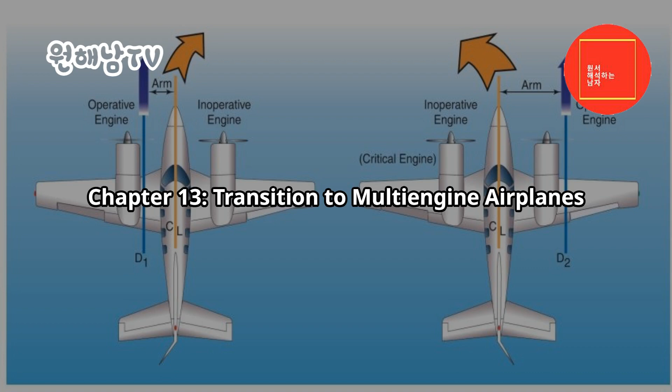Chapter 13 – Transition to multi-engine airplanes. Introduction. This chapter is devoted to the factors associated with the operation of small multi-engine airplanes.

For the purpose of this handbook, a small multi-engine airplane is a reciprocating or turbopropeller-powered airplane with a maximum certificated takeoff weight of 12,500 pounds or less. This discussion assumes a conventional design with two engines, one mounted on each wing. Reciprocating engines are assumed unless otherwise noted. The term light twin, although not formally defined in the regulations, is used herein as a small multi-engine airplane with a maximum certificated takeoff weight of 6,000 pounds or less.

There are several unique characteristics of multi-engine airplanes that make them worthy of a separate class rating. The one-engine inoperative (OEI) flight information presented in this chapter emphasizes the significant difference between flying a multi-engine and a single-engine airplane. However, all pilots need appropriate knowledge, risk management strategies, and skills to fly safely in any airplane they fly, and mastery of OEI flight is only one aspect of safe multi-engine flying.

The modern, well-equipped multi-engine airplane can be remarkably capable under many circumstances, but the performance and system redundancy of a multi-engine airplane only increase safety if the pilot is trained and proficient. The airplane manufacturer is the final authority on the operation of a particular make and model airplane. Flight instructors and learners should use the FAA-Approved Airplane Flight Manual (AFM) and/or the Pilot's Operating Handbook (POH). The airplane manufacturer's guidance and procedures take precedence over any general recommendations made in this handbook.

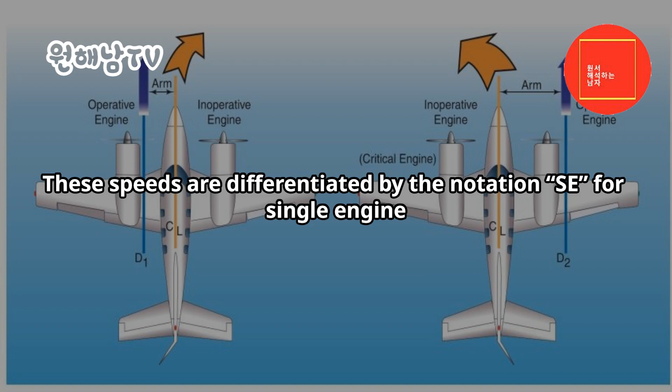Terms and definitions. Pilots of single-engine airplanes are already familiar with many performance V-speeds and their definitions. Twin-engine airplanes have several additional V-speeds unique to OEI operation. These speeds are differentiated by the notation SE for single-engine. A review of some key V-speeds and several new V-speeds unique to twin-engine airplanes are listed below.

VR – rotation speed, the speed at which back pressure is applied to rotate the airplane to a takeoff attitude. VLOF – lift-off speed, the speed at which the airplane leaves the surface. Note: some manufacturers reference takeoff performance data to VR, others to VLOF.

Vx – best angle of climb speed, the speed at which the airplane gains the greatest altitude for a given distance of forward travel. VXSE – best angle of climb speed with OEI. Vy – best rate of climb speed, the speed at which the airplane gains the most altitude for a given unit of time. VYSE – best rate of climb speed with OEI, marked with a blue radial line on most airspeed indicators. Above the single-engine absolute ceiling, VYSE yields the minimum rate of sink.

VSSE – safe, intentional OEI speed, originally known as safe single-engine speed. It is the minimum speed to intentionally render the critical engine inoperative. VREF – reference landing speed, an airspeed used for final approach, which is normally 1.3 times VSO, the stall speed in the landing configuration. The pilot may adjust the approach speed for winds and gusty conditions by using VREF plus an additional number of units, e.g., VREF plus 5.

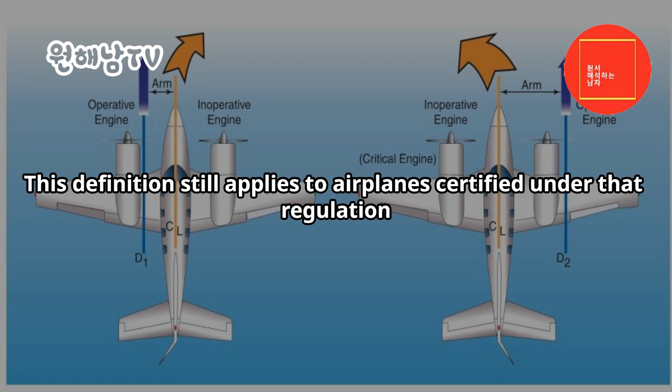VMC was previously defined in 14 CFR Part 23, Section 23.149 as the calibrated airspeed at which, when the critical engine is suddenly made inoperative, it is possible to maintain control of the airplane with that engine still inoperative, and thereafter maintain straight flight at the same speed with an angle of bank of not more than 5 degrees. This definition still applies to airplanes certified under that regulation. There is no requirement under either determination that the airplane be capable of climbing at this airspeed.

VMC only addresses directional control. Further discussion of VMC as determined during airplane certification and demonstrated in pilot training follows later in this chapter. Unless otherwise noted, when V-speeds are given in the AFM/POH, they apply to sea level, standard day conditions at maximum takeoff weight. Performance speeds vary with aircraft weight, configuration, and atmospheric conditions.

Speeds may be stated in statute miles per hour (mph) or knots (kt), and they may be given as calibrated airspeeds (CAS) or indicated airspeeds (IAS). As a general rule, the newer AFM/POHs show V-speeds in knots indicated airspeed (KIAS). Some V-speeds are also stated in knots calibrated airspeed (KCAS) to meet certain regulatory requirements. Whenever available, pilots should operate the airplane from published indicated airspeeds.

Rate of climb is the altitude gain per unit of time, while climb gradient is the actual measure of altitude gain per 100 feet of horizontal travel, expressed as a percentage. An altitude gain of 1.5 feet per 100 feet of travel, or 15 feet per 1,000, or 150 feet per 10,000, is a climb gradient of 1.5%.

There is a dramatic performance loss associated with the loss of an engine, particularly just after takeoff. Any airplane's climb performance is a function of thrust horsepower in excess of that required for level flight. In a hypothetical twin with each engine producing 200 thrust horsepower, assume the total level flight thrust horsepower required is 175. The airplane would ordinarily have a reserve of 225 thrust horsepower available for climb. Loss of one engine would leave only 25 (200-175) thrust horsepower available for climb, a drastic reduction.

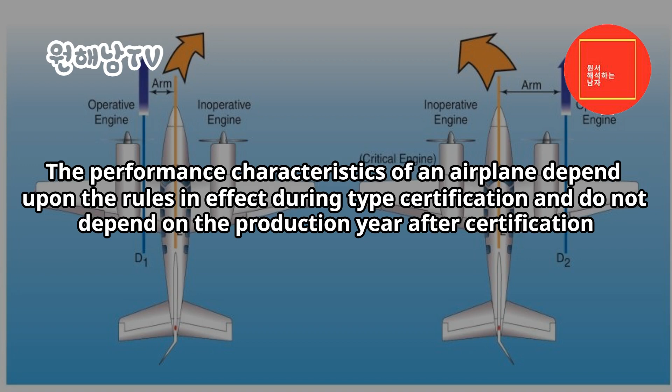The performance characteristics of an airplane depend upon the rules in effect during type certification, and do not depend on the production year after certification. The current amendment to 14 CFR Part 23, 81 FR 96689, went into effect on August 30, 2017. This includes certification of normal category airplanes with a passenger seating configuration of 19 or less, and a maximum certificated takeoff weight of 19,000 pounds or less, Section 23.2005(a).

Current 14 CFR Part 23 certification rules, Section 23.2005(b), classify airplanes into certification levels 1 through 4 based on maximum passenger seating configuration. For example, a Level 2 airplane has a passenger seating configuration between 2 and 6 passengers. The rule further divides airplanes into two different performance levels based on speed, Section 23.2005(c).

After a critical loss of thrust, a Level 2 low-speed airplane (VNO or VMO less than or equal to 250 knots calibrated airspeed, and MMO less than or equal to 0.6) that does not meet single-engine crashworthiness requirements requires a climb gradient of at least 1.5% at a pressure altitude of 5,000 feet in the cruise configuration for certification, Section 23.2120(b)(1).

While the various subsets of airplanes receiving certification under the current Part 23 meet specific single-engine climb performance criteria, as listed in 14 CFR Part 23, Section 23.2120(b), the historical 14 CFR Part 23 single-engine climb performance requirements for reciprocating engine-powered multi-engine airplanes are broken down as follows.

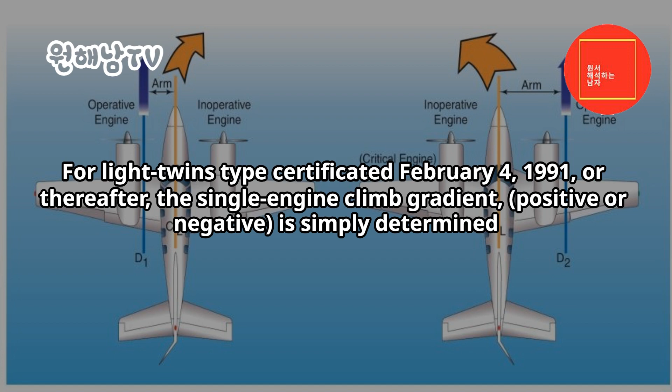Operation of systems. This section deals with systems and equipment that are generally installed in multi-engine airplanes. Multi-engine airplanes share many features with complex single-engine airplanes; however, there are certain features that are found more often in airplanes with 2 or more engines.

Feathering propellers. Although the propellers of a multi-engine airplane may appear identical to a constant-speed propeller used in many single-engine airplanes, this is usually not the case. The pilot of a typical multi-engine airplane can feather the propeller of an inoperative engine, since it stops engine rotation with the propeller blade streamlined with the airplane's relative wind. Feathering the propeller of an inoperative engine minimizes propeller drag (Figure 13-2). Depending upon single-engine performance, this feature often permits continued flight to a suitable airport following an engine failure.

Feathering is important because of the change in parasite drag with propeller blade angle (Figure 13-3). When the propeller blade angle is in the feathered position, parasite drag from the propeller is at a minimum.

In a typical multi-engine airplane, the parasite drag from a single, feathered propeller is a small part of the airplane's total drag. At the smaller blade angles near the flat pitch position, the drag added by the propeller is large. At these small blade angles, the propeller windmilling at high RPM can create enough drag to make the airplane difficult or impossible to control. A propeller windmilling at high speed in the low range of blade angles can produce parasite drag as great as the parasite drag of the entire airframe.

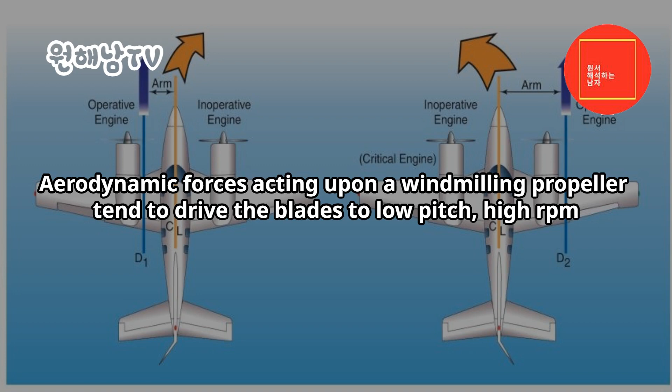In effect, the only thing that keeps these propellers from feathering is a constant supply of high-pressure engine oil. This is necessary to enable propeller feathering in the event of a loss of oil pressure or a propeller governor failure. Aerodynamic forces acting upon a windmilling propeller tend to drive the blades to low pitch, high RPM. Counterweights attached to the shank of each blade tend to force the blades to high pitch, low RPM. Inertia, or the apparent force called centrifugal force, acting through the counterweights, is generally slightly greater than the aerodynamic forces.

Therefore, centrifugal force would drive the blades to high pitch and low RPM were it not for an additional force acting through the propeller governor. A controlling force generated from high-pressure oil from the propeller governor pushes the propeller blade angles toward low pitch and high RPM. Thus, a reduction in oil pressure allows the counterweights to drive the blades to a higher pitch and decreases engine RPM.

To feather the propeller, the control is brought fully aft. All oil pressure is dumped from the governor, and the counterweights drive the propeller blades toward feather. As centrifugal force acting on the counterweights decays from decreasing RPM, additional force is needed to completely feather the blades. This additional force comes from either a spring or high-pressure air stored in the propeller dome, which forces the blades into the feathered position. The entire process may take up to 10 seconds.

Feathering a propeller only alters blade angle and stops engine rotation. To completely secure the engine, the pilot turns off the fuel, mixture, electric boost pump, fuel selector, ignition, and alternator/generator, and closes the cowl flaps. If the airplane is pressurized, there may also be an air bleed to close for the failed engine. Some airplanes are equipped with firewall shutoff valves that secure several of these systems with a single switch.

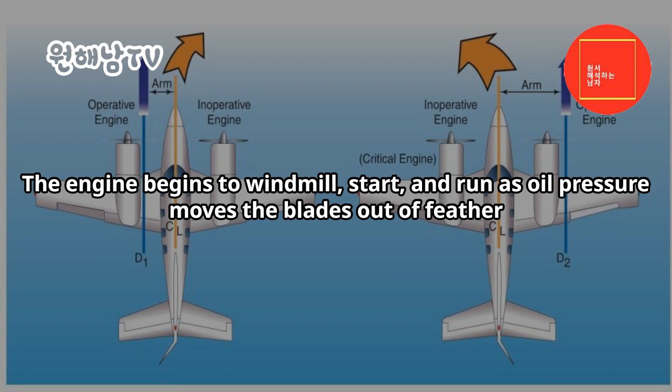To unfeather a propeller, the engine should be rotated so that oil pressure can be generated to move the propeller blades from the feathered position. The ignition is turned on prior to engine rotation with the throttle at low idle and the mixture rich. With the propeller control in a high RPM position, the starter is engaged. The engine begins to windmill, start, and run as oil pressure moves the blades out of feather. As the engine starts, the propeller RPM should be immediately reduced until the engine has had several minutes to warm up. The pilot should monitor cylinder head and oil temperatures.

An unfeathering accumulator is a device that permits starting a feathered engine in flight without the use of the electric starter. An accumulator is any device that stores a reserve of high pressure. On multi-engine airplanes, the unfeathering accumulator stores a small reserve of engine oil under pressure from compressed air or nitrogen.

To start a feathered engine in flight, the pilot moves the propeller control out of the feather position to release the accumulator pressure. The oil flows under pressure to the propeller hub and drives the blades toward the high RPM, low pitch position, whereupon the propeller usually begins to windmill. If fuel and ignition are present, the engine starts and runs. High oil pressure from the propeller governor recharges the accumulator just moments after engine rotation begins, making it available for another unfeathering cycle, if needed.

For airplanes used in training, an unfeathering accumulator may prolong the life of the electric starter and battery. If the accumulator fails to bring the propeller out of feather, the electric starter may be engaged. In any event, the AFM/POH procedures should be followed for the exact unfeathering procedure.

Both feathering and starting a feathered reciprocating engine on the ground are strongly discouraged by manufacturers due to the excessive stress and vibrations generated. As just described, a loss of oil pressure from the propeller governor allows the counterweights, spring, and/or dome charge to drive the blades to feather.

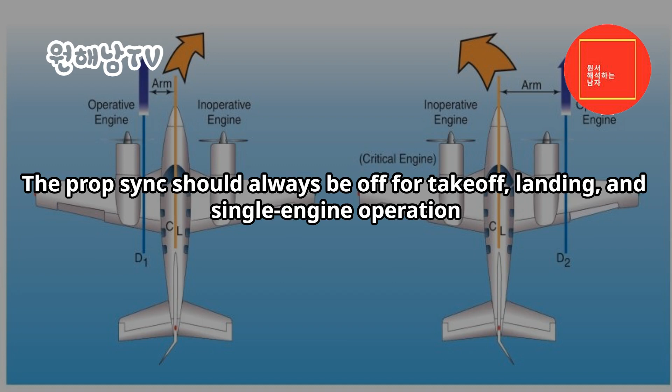The prop sync should always be off for takeoff, landing, and single-engine operation. The AFM/POH should be consulted for system description and limitations.

A variation on the propeller synchronizer is the propeller synchrophaser. A propeller synchrophaser acts much like a synchronizer to precisely match RPM, but it goes one step further. It not only matches RPM but actually compares and adjusts the positions of the individual blades of the propellers in their arcs. There can be significant propeller noise and vibration reductions with a propeller synchrophaser.

From the pilot's perspective, operation of a propeller synchronizer and a propeller synchrophaser are very similar. A synchrophaser is also commonly referred to as prop sync, although that is not entirely correct nomenclature from a technical standpoint.

As a pilot aid to manually synchronizing the propellers, some twins have a small gauge mounted in or by the tachometers, with a propeller symbol on a disc that spins. The pilot manually fine-tunes the engine RPM so as to stop disc rotation, thereby synchronizing the propellers.

This is a useful backup to synchronizing engine RPM using the audible propeller beat. This gauge is also found installed with most propeller synchronizer and synchrophaser systems. Some synchrophaser systems use a knob for the pilot to control the phase angle.

Fuel crossfeed: fuel crossfeed systems are also unique to multi-engine airplanes. Using crossfeed, an engine can draw fuel from a fuel tank located in the opposite wing. On most multi-engine airplanes, operation in the crossfeed mode is an emergency procedure used to extend airplane range and endurance in OEI flight.

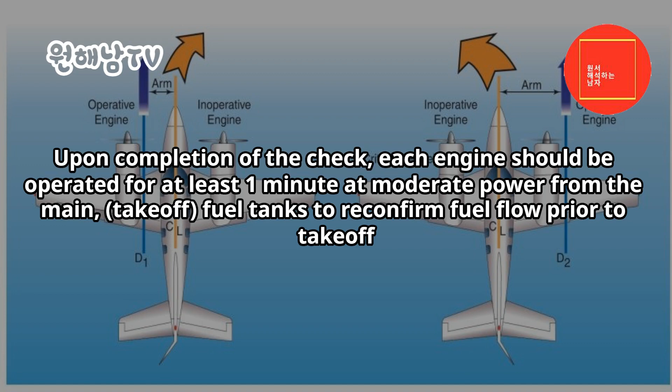This suggested check is not required prior to every flight. Crossfeed lines are ideal places for water and debris to accumulate unless they are used from time to time and drained using their external drains during pre-flight. Crossfeed is ordinarily not used for completing a flight with one engine inoperative when an alternate airport is nearby.

Pilots should never use crossfeed during takeoff or for normal landing operations with both engines operating. A landing with one engine inoperative using crossfeed may be necessary if setting normal fuel flow would cause the operative engine to fail.

Combustion heater. Combustion heaters are another common item on multi-engine airplanes not found on single-engine airplanes. A combustion heater is best described as a small furnace that burns gasoline to produce heated air for occupant comfort and windshield defogging.

Most are thermostatically operated and have a separate hour meter to record time in service for maintenance purposes. Automatic over-temperature protection is provided by a thermal switch mounted on the unit that cannot be accessed in flight. This requires the pilot or mechanic to visually inspect the unit for possible heat damage in order to reset the switch.

Manufacturers often suggest a cool-down period when shutting down a combustion heater. Most heater instructions recommend that outside air be permitted to circulate through the unit for at least 15 seconds in flight, or that the ventilation fan can be operated for at least 2 minutes on the ground. Failure to provide an adequate cool-down usually trips the thermal switch and renders the heater inoperative until the switch is reset.

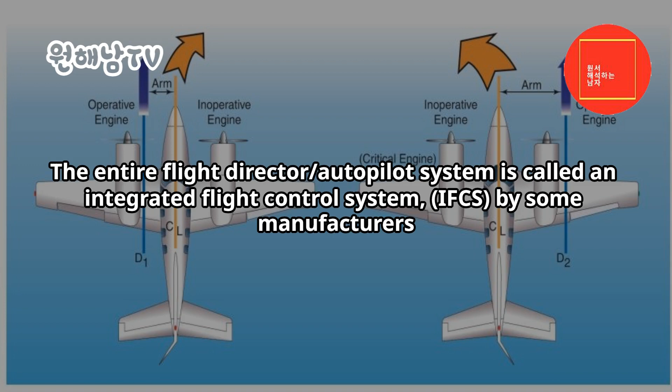The entire Flight Director Autopilot system is called an Integrated Flight Control System (IFCS) by some manufacturers. Others may use the term Automatic Flight Control System (AFCS). The FD, AP system may be employed at the following different levels.

Off, raw data. Flight Director, computed commands. Autopilot. With the system off, the FCI operates as an ordinary attitude indicator. On most FCIs, the command bars are biased out of view when the FD is off. The pilot maneuvers the airplane as though the system were not installed.

To maneuver the airplane using the FD, the pilot enters the desired modes of operation: heading, altitude, navigation, nav intercept, and tracking on the FD, AP mode controller. The computed flight commands are then displayed to the pilot through either a single cue or dual cue system in the FCI.

On a single cue system, the commands are indicated by V-bars. On a dual cue system, the commands are displayed on two separate command bars, one for pitch and one for roll. To maneuver the airplane using computed commands, the pilot flies the symbolic airplane of the FCI to match the steering cues presented.

On most systems, the FD needs to be operating to engage the autopilot. At any time thereafter, the pilot may engage the autopilot through the mode controller. The autopilot then maneuvers the airplane to satisfy the computed commands of the FD.

Like any computer, the FD, AP system only does what it is told. The pilot should ensure that it has been programmed properly for the particular phase of flight desired. The armed and/or engaged modes are usually displayed on the mode controller or separate annunciator lights.

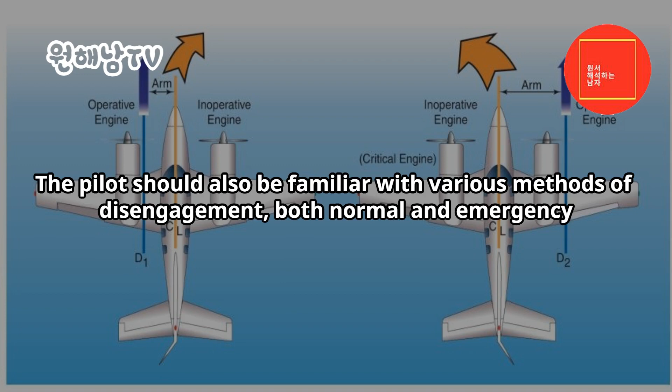The pilot should also be familiar with various methods of disengagement, both normal and emergency. System details, including approvals and limitations, can be found in the supplements section of the AFM/POH. Additionally, many avionics manufacturers can provide informative pilot operating guides upon request.

Yaw damper. The yaw damper is a servo that moves the rudder in response to inputs from a gyroscope or accelerometer that detects yaw rate or lateral Gs, respectively. The yaw damper reduces motion about the vertical axis caused by turbulence. Yaw dampers on swept-wing airplanes provide another, more vital function of damping Dutch roll characteristics.

Occupants feel a smoother ride, particularly if seated in the rear of the airplane, when the yaw damper is engaged. The yaw damper should be off for takeoff and landing. There may be additional restrictions against its use with one engine inoperative. Most yaw dampers can be engaged independently of the autopilot.

Alternator generator. On a multi-engine aircraft, each engine has an alternator or generator installed. Alternator or generator paralleling circuitry matches the output of each engine's alternator generator, so that the electrical system load is shared equally between them.

In the event of an alternator/generator failure, the inoperative unit can be isolated and the entire electrical system powered from the remaining one. Depending upon the electrical capacity of the alternator/generator, the pilot may need to reduce the electrical load, referred to as load shedding, when operating on a single unit. The AFM/POH contains system description and limitations.

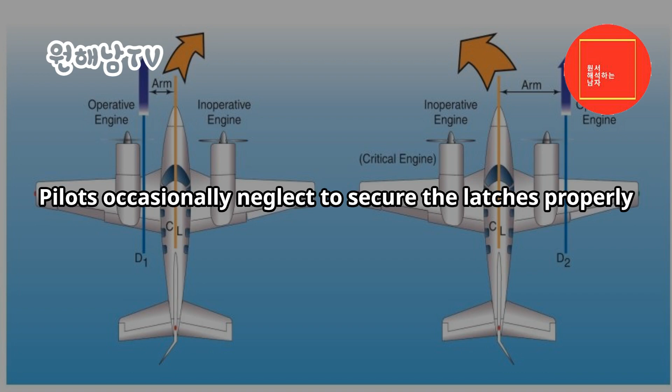Nose baggage compartment. Nose baggage compartments are common on multi-engine airplanes, and are even found on a few single-engine airplanes. There is nothing strange or exotic about a nose baggage compartment, and the usual guidance concerning observation of load limits applies. Pilots occasionally neglect to secure the latches properly. When improperly secured, the door may open and the contents may be drawn out, usually into the propeller arc and just after takeoff. Even when the nose baggage compartment is empty, airplanes have been lost when the pilot became distracted by the open door. Security of the nose baggage compartment latches and locks is a vital pre-flight item.

Most airplanes continue to fly with a nose baggage door open. There may be some buffeting from the disturbed airflow, and there is an increase in noise. Pilots should never become so preoccupied with an open door, of any kind, that they fail to fly the airplane. Inspection of the compartment interior is another important pre-flight item. More than one pilot has been surprised to find a supposedly empty compartment packed to capacity or loaded with ballast. The tow bars, engine inlet covers, windshield sunscreens, oil containers, spare chocks, and miscellaneous small hand tools that find their way into baggage compartments should be secured to prevent damage from shifting in flight.

Anti-icing/de-icing equipment. Anti-icing/de-icing equipment is frequently installed on multi-engine airplanes and may consist of a combination of different systems. These may be classified as either anti-icing or de-icing, depending upon function. The presence of anti-icing and de-icing equipment, even though it may appear elaborate and complete, does not necessarily mean that the airplane is approved for flight in icing conditions. The AFM/POH, placards, and even the manufacturer should be consulted for specific determination of approvals and limitations.

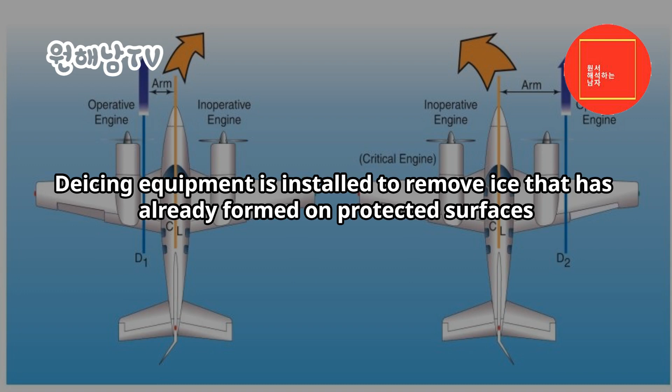De-icing equipment is generally limited to pneumatic boots on wing and tail leading edges. De-icing equipment is installed to remove ice that has already formed on protected surfaces. Upon pilot actuation, the boots inflate with air from the pneumatic pumps to break off accumulated ice. After a few seconds of inflation, they are deflated back to their normal position with the assistance of a vacuum. The pilot monitors the buildup of ice and cycles the boots as directed in the AFM/POH. An ice light on the left engine nacelle allows the pilot to monitor wing ice accumulation at night.

Other airframe equipment necessary for flight in icing conditions includes an alternate induction air source and an alternate static system source. Ice-tolerant antennas are also installed. In the event of impact ice accumulating over normal engine air induction sources, carburetor heat (carbureted engines) or alternate air (fuel-injected engines) should be selected. Ice buildup on normal induction sources can be detected by a loss of engine RPM with fixed-pitch propellers and a loss of manifold pressure with constant-speed propellers. On some fuel-injected engines, an alternate air source is automatically activated with blockage of the normal air source.

The pilot may activate the alternate static source by opening a valve or a fitting in the flight deck. Activation may create airspeed indicator, altimeter, or vertical speed indicator (VSI) errors. A correction table is frequently provided in the AFM/POH.

Anti-icing/de-icing equipment only eliminates ice from the protected surfaces. Significant ice accumulations may form on unprotected areas, even with proper use of anti-ice and de-ice systems. Flight at high angles of attack (AOA), or even normal climb speeds, permits significant ice accumulations on lower wing surfaces, which are unprotected. Many AFM/POHs provide minimum speeds to be maintained in icing conditions. Degradation of all flight characteristics and large performance losses can be expected with ice accumulations. Pilots should not rely upon the stall warning devices for adequate stall warning with ice accumulations.

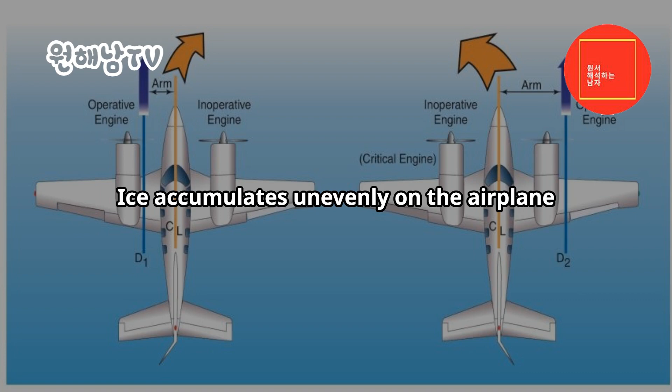Ice accumulates unevenly on the airplane. It adds weight and drag, primarily drag, and decreases thrust and lift. Even wing shape affects ice accumulation. Thin airfoil sections are more prone to ice accumulation than thick, highly cambered sections. For this reason, certain surfaces, such as the horizontal stabilizer, are more prone to icing than the wing.

With ice accumulations, landing approaches should be made with a minimum wing flap setting, since flap extension increases the AOA of the horizontal stabilizer, and with an added margin of airspeed. Sudden and large configuration and airspeed changes should be avoided.

Unless otherwise recommended in the AFM/POH, the autopilot should not be used in icing conditions. Continuous use of the autopilot masks trim and handling changes that occur with ice accumulation. Without this control feedback, the pilot may not be aware of ice accumulation building to hazardous levels. The autopilot suddenly disconnects when it reaches design limits, and the pilot may find the airplane has assumed unsatisfactory handling characteristics.

The installation of anti-ice/de-ice equipment on airplanes without AFM/POH approval for flight into icing conditions is to facilitate escape when such conditions are inadvertently encountered. Even with AFM/POH approval, the prudent pilot avoids icing conditions to the maximum extent practicable and avoids extended flight in any icing conditions. No multi-engine airplane is approved for flight into severe icing conditions, and none are intended for indefinite flight in continuous icing conditions.

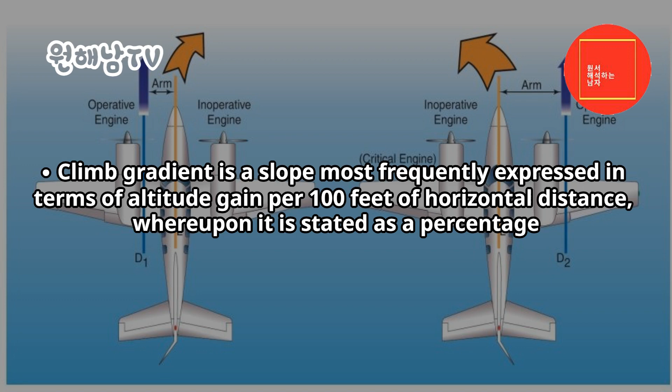Climb gradient is a slope most frequently expressed in terms of altitude gain per 100 feet of horizontal distance, whereupon it is stated as a percentage. A 1.5% climb gradient is an altitude gain of 1.5 feet per 100 feet of horizontal travel. Climb gradient may also be expressed as a function of altitude gain per nautical mile, NM, or as a ratio of the horizontal distance to the vertical distance, 10:1, for example. Unlike rate of climb, climb gradient is affected by wind. Climb gradient is improved with a headwind component and reduced with a tailwind component.

The all-engine service ceiling of multi-engine airplanes is the highest altitude at which the airplane can maintain a steady rate of climb of 100 fpm with both engines operating. The airplane has reached its absolute ceiling when climb is no longer possible. The single-engine service ceiling is reached when the multi-engine airplane can no longer maintain a 50 fpm rate of climb with OEI, and its single-engine absolute ceiling when climb is no longer possible.

The takeoff in a multi-engine airplane should be planned in sufficient detail so that the appropriate action is taken in the event of an engine failure. The pilot should be thoroughly familiar with the airplane's performance, capabilities and limitations in order to make an informed takeoff decision as part of the pre-flight planning. That decision should be reviewed as the last item of the before takeoff checklist.

In the event of an engine failure shortly after takeoff, the decision is basically one of continuing flight or landing, even off airport. If single-engine climb performance is adequate for continued flight, and the airplane has been promptly and correctly configured, the climb after takeoff may be continued. If single-engine climb performance is such that climb is unlikely or impossible, a landing has to be made in the most suitable area. To be avoided above all is attempting to continue flight when it is not within the airplane's performance capability to do so.

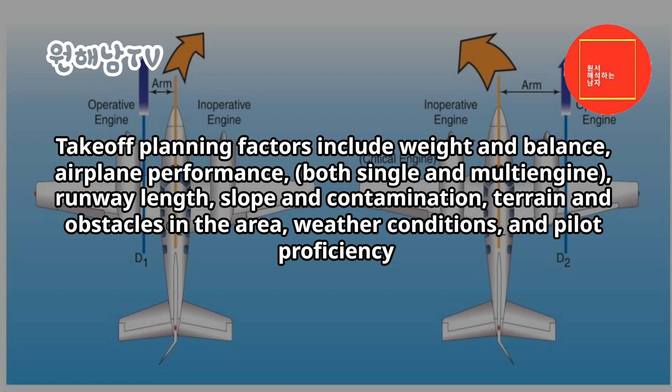Takeoff planning factors include weight and balance, airplane performance, both single and multi-engine, runway length, slope and contamination, terrain and obstacles in the area, weather conditions, and pilot proficiency. Most multi-engine airplanes have AFM/POH performance charts and the pilot should be proficient in their use. Prior to takeoff, the multi-engine pilot should ensure that the weight and balance limitations have been observed, the runway length is adequate, and the normal flight path clears obstacles and terrain.

The pilot should also consider the appropriate actions expected in the event of an engine failure at any point during the takeoff. The regulations do not specifically require that the runway length be equal to or greater than the accelerate-stop distance. Most AFM/POHs publish accelerate-stop distances only as an advisory. It becomes a limitation only when published in the limitations section of the AFM/POH.

Experienced multi-engine pilots, however, recognize the safety margin of runway lengths in excess of the bare minimum required for normal takeoff, and they insist on runway lengths of at least accelerate stop distance as a matter of safety and good operating practice. The multi-engine pilot considers that under ideal circumstances, the accelerate go distance only brings the airplane to a point a mere 50 feet above the takeoff elevation.

To achieve even this meager climb, the pilot had to instantaneously recognize and react to an unanticipated engine failure, retract the landing gear, identify and feather the correct engine, all the while maintaining precise airspeed control and bank angle as the airspeed is nursed to VYSE. Assuming flawless airmanship thus far, the airplane has now arrived at a point little more than one wingspan above the terrain, assuming it was absolutely level and without obstructions.

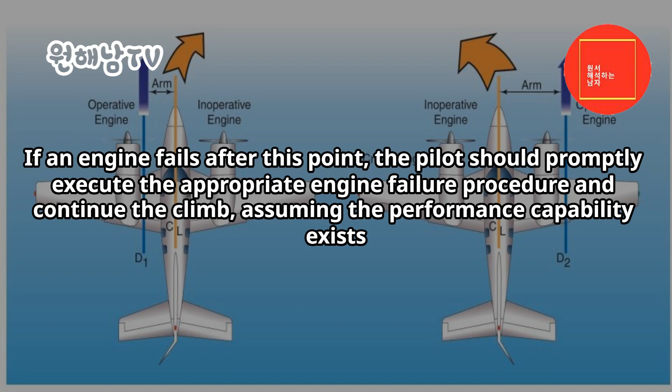The prudent multi-engine pilot should pick a decision point in the takeoff and climb sequence in advance. If an engine fails before this point, the takeoff should be rejected, even if airborne, for a landing on whatever runway or surface lies essentially ahead. If an engine fails after this point, the pilot should promptly execute the appropriate engine failure procedure and continue the climb, assuming the performance capability exists. As a general recommendation, if the landing gear has not been selected up, the takeoff should be rejected, even if airborne.

As a practical matter for planning purposes, the option of continuing the takeoff probably does not exist, unless the published single-engine rate of climb performance is at least 100 to 200 fpm. Thermal turbulence, wind gusts, engine and propeller wear, or poor technique in airspeed, bank angle, and rudder control can easily negate even a 200 fpm rate of climb.

A pre-takeoff safety brief clearly defines all pre-planned emergency actions to all crew members. Even if operating the aircraft alone, the pilot should review and be familiar with takeoff emergency considerations. Indecision at the moment an emergency occurs degrades reaction time and the ability to make a proper response.

Weight and balance. The weight and balance concept is no different than that of a single-engine airplane. The actual execution, however, is almost invariably more complex due to a number of new loading areas, including nose and aft baggage compartments, nacelle lockers, main fuel tanks, auxiliary fuel tanks, nacelle fuel tanks, and numerous seating options in a variety of interior configurations. The flexibility in loading offered by the multi-engine airplane places a responsibility on the pilot to address weight and balance prior to each flight.

The terms empty weight, licensed empty weight, standard empty weight, and basic empty weight as they appear on the manufacturer's original weight and balance documents are sometimes confused by pilots. In 1975, the General Aviation Manufacturers Association (GAMA) adopted a standardized format for AFM/POHs. It was implemented by most manufacturers in model year 1976. Airplanes whose manufacturers conform to the GAMA standards utilize the following terminology for weight and balance.

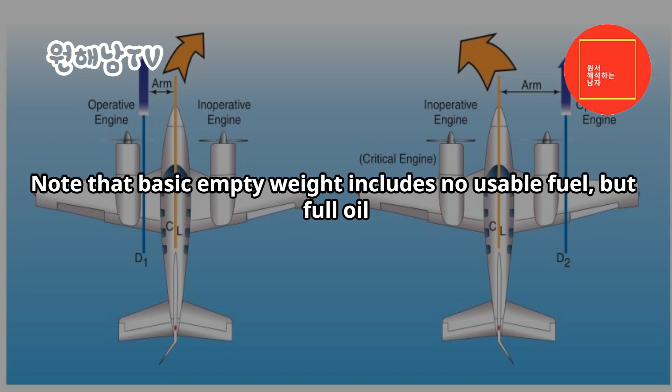Airplanes manufactured prior to the GAMA format generally utilize the following terminology for weight and balance, although the exact terms may vary somewhat. Empty weight plus unusable fuel equals standard empty weight. Standard empty weight plus optional equipment equals licensed empty weight. Empty weight is the weight of the standard airplane, full hydraulic fluid, and undrainable oil. Unusable fuel is the fuel remaining in the airplane not available to the engines.

Standard empty weight is the empty weight plus unusable fuel. When optional equipment is added to the standard empty weight, the result is licensed empty weight, which includes the standard airplane, optional equipment, full hydraulic fluid, unusable fuel, and undrainable oil. The major difference between the two formats, GAMA and the old, is that basic empty weight includes full oil and licensed empty weight does not. Oil should always be added to any weight and balance utilizing a licensed empty weight.

When the airplane is placed in service, amended weight and balance documents are prepared by appropriately rated maintenance personnel to reflect changes in installed equipment. The old weight and balance documents are customarily marked superseded and retained in the AFM/POH. Maintenance personnel are under no regulatory obligation to utilize the GAMA terminology, so weight and balance documents subsequent to the original may use a variety of terms. Pilots should use care to determine whether or not oil has to be added to the weight and balance calculations, or if it is already included in the figures provided.

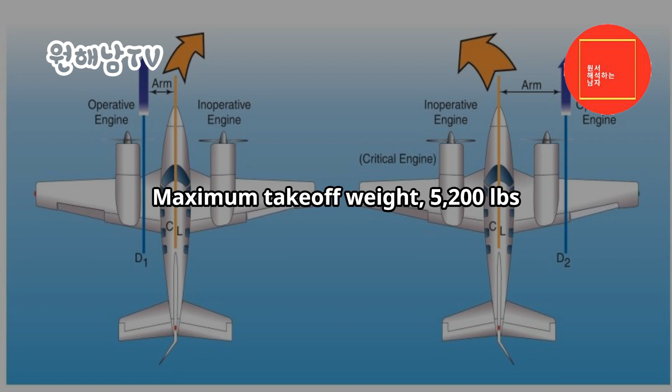Assume a hypothetical multi-engine airplane with the following weights and capacities: basic empty weight, 3,200 pounds; zero fuel weight, 4,400 pounds; maximum takeoff weight, 5,200 pounds; maximum usable fuel, 180 gallons.

1. Calculate the useful load. Maximum takeoff weight, 5,200 pounds. Basic empty weight, minus 3,200 pounds. Useful load, 2,000 pounds. The useful load is the maximum combination of usable fuel, passengers, baggage, and cargo that the airplane is capable of carrying.

2. Calculate the payload. Zero fuel weight, 4,400 pounds. Basic empty weight, minus 3,200 pounds. Payload, 1,200 pounds. The payload is the maximum combination of passengers, baggage, and cargo that the airplane is capable of carrying. A zero fuel weight, if published, is the limiting weight.

3. Calculate the fuel capacity at maximum payload, 1,200 pounds. Maximum takeoff weight, 5,200 pounds. Zero fuel weight, minus 4,400 pounds. Fuel allowed, 800 pounds. Assuming maximum payload, the only weight permitted in excess of the zero fuel weight should consist of usable fuel. In this case, 133.3 gallons.

4. Calculate the payload at maximum fuel capacity, 180 gallons. Basic empty weight, 3,200 pounds. Maximum usable fuel, plus 1,080 pounds. Weight with max fuel, 4,280 pounds. Maximum takeoff weight, 5,200 pounds. Weight with max fuel, minus 4,280 pounds. Payload allowed, 920 pounds. Assuming maximum fuel, the payload is the difference between the weight of the fueled airplane and the maximum takeoff weight.

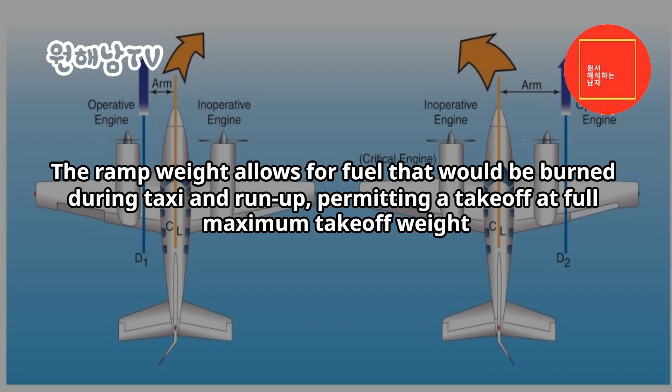Some multi-engine airplanes have a ramp weight, which is in excess of the maximum takeoff weight. The ramp weight allows for fuel that would be burned during taxi and run up, permitting a takeoff at full maximum takeoff weight. The airplane should weigh no more than maximum takeoff weight at the beginning of the takeoff roll.

A maximum landing weight is a limitation against landing at a weight in excess of the published value. This requires pre-flight planning of fuel burn to ensure that the airplane weight upon arrival at destination is at or below the maximum landing weight. In the event of an emergency requiring an immediate landing, the pilot should recognize that the structural margins designed into the airplane are not fully available when over landing weight. An overweight landing inspection may be advisable. The service manual or manufacturer should be consulted.

Although the foregoing problems only dealt with weight, the balance portion of weight and balance is equally vital. The flight characteristics of the multi-engine airplane vary significantly with shifts of the center of gravity, CG, within the approved envelope. At forward CG, the airplane is more stable, with a slightly higher stalling speed, a slightly slower cruising speed, and favorable stall characteristics. At aft CG, the airplane is less stable, with a slightly lower stalling speed, a slightly faster cruising speed, and less desirable stall characteristics.

Forward CG limits are usually determined in certification by elevator/stabilator authority in the landing roundout. Aft CG limits are determined by the minimum acceptable longitudinal stability.

It is contrary to the airplane's operating limitations in 14 CFR to exceed any weight and balance parameter. Some multi-engine airplanes may require ballast to remain within CG limits under certain loading conditions.

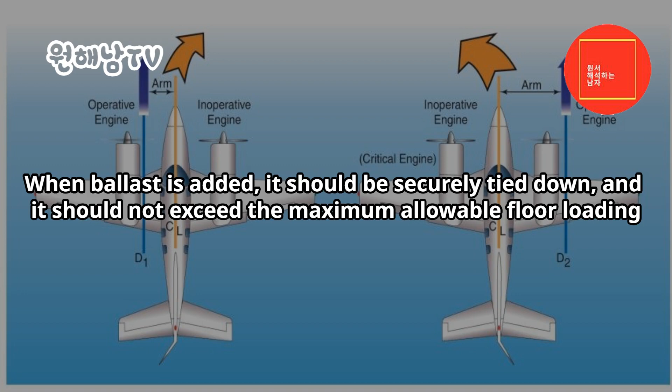The pilot should direct the seating of passengers and placement of baggage and cargo to achieve a CG within the approved envelope. Most multi-engine airplanes have general loading recommendations in the weight and balance section of the AFM/POH. When ballast is added, it should be securely tied down, and it should not exceed the maximum allowable floor loading.

Some airplanes make use of a special weight and balance plotter. It consists of several movable parts that can be adjusted over a plotting board on which the CG envelope is printed. The reverse side of the typical plotter contains general loading recommendations for the particular airplane.

A pencil line plot can be made directly on the CG envelope imprinted on the working side of the plotting board. This plot can easily be erased and recalculated anew for each flight. This plotter is to be used only for the make and model airplane for which it was designed.

Ground operation: good habits learned with single-engine airplanes are directly applicable to multi-engine airplanes for pre-flight and engine start. Upon placing the airplane in motion to taxi, the new multi-engine pilot may notice several differences. The most obvious is the increased wingspan and the need for even greater vigilance while taxiing in close quarters.

Ground handling may seem somewhat ponderous, and the multi-engine airplane is not as nimble as the typical 2- or 4-place single-engine airplane. As always, the pilot should use care not to ride the brakes by keeping engine power to a minimum. One ground handling advantage of the multi-engine airplane over single-engine airplanes is the differential power capability.

Turning with an assist from differential power minimizes both the need for brakes during turns and the turning radius. The pilot should be aware, however, that making a sharp turn, assisted by brakes and differential power, can cause the airplane to pivot about a stationary inboard wheel and landing gear. The airplane was not designed for this action, and the pilot should not allow it to occur.

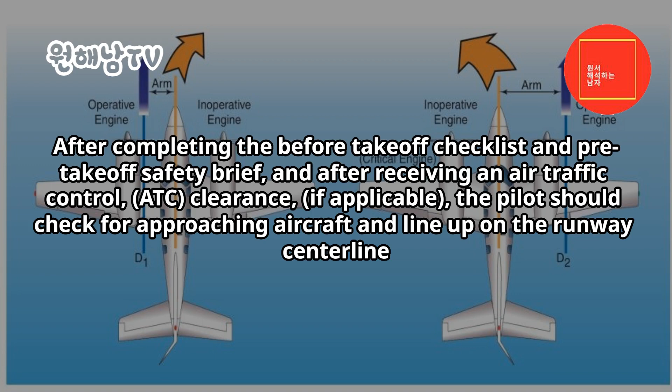Normal and crosswind takeoff and climb. After completing the before takeoff checklist and pre-takeoff safety brief, and after receiving an air traffic control (ATC) clearance, if applicable, the pilot should check for approaching aircraft and line up on the runway centerline.

If departing from an airport without an operating control tower, the pilot should listen on the appropriate frequency, make a careful check for traffic, and transmit a radio advisory before entering the runway.

Sharp turns onto the runway combined with a rolling takeoff are not a good operating practice and may be prohibited by the AFM/POH due to the possibility of unporting a fuel tank pickup. The takeoff itself may be prohibited by the AFM/POH under any circumstances below certain fuel levels.

The flight controls should be positioned for a crosswind, if present. Exterior lights, such as landing and taxi lights, and wingtip strobes should be illuminated immediately prior to initiating the takeoff roll, day or night. If holding in takeoff position for any length of time, particularly at night, the pilot should activate all exterior lights upon taxiing into position.

Takeoff power should be set as recommended in the AFM/POH. With normally aspirated, non-turbocharged engines, this is full throttle. Full throttle is also used in most turbocharged engines.

There are some turbocharged engines, however, that require the pilot to set a specific power setting, usually just below redline manifold pressure. This yields takeoff power with less than full throttle travel. Turbocharged engines often require special consideration. Throttle motion with turbocharged engines should be exceptionally smooth and deliberate.

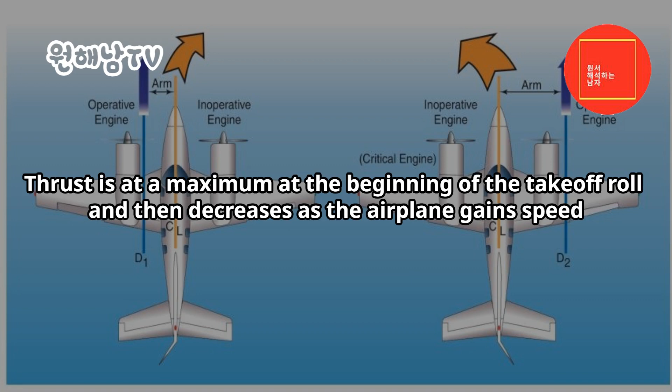Note that for all airplanes equipped with constant speed propellers, the engines can turn at maximum RPM and develop maximum engine power before brake release. Although the mass of air per revolution is small, the number of RPM is high and propeller thrust is maximized. Thrust is at a maximum at the beginning of the takeoff roll and then decreases as the airplane gains speed. The high slipstream velocity during takeoff increases the effective lift of the wing behind the propellers.

As takeoff power is established, initial attention should be divided between tracking the runway centerline and monitoring the engine gauges. Many novice multi-engine pilots tend to fixate on the airspeed indicator just as soon as the airplane begins its takeoff roll. Instead, the pilot should confirm that both engines are developing full-rated manifold pressure and RPM, and that fuel flows, fuel pressures, exhaust gas temperatures (EGTs), and oil pressures are matched in their normal ranges. A directed and purposeful scan of the engine gauges can be accomplished well before the airplane approaches rotation speed.

If a crosswind is present, the aileron displacement in the direction of the crosswind may be reduced as the airplane accelerates. The elevator/stabilator control should be held neutral throughout.

Full-rated takeoff power should be used for every takeoff. Partial power takeoffs are not recommended. There is no evidence to suggest that the life of modern reciprocating engines is prolonged by partial power takeoffs. In actuality, excessive heat and engine wear can occur with partial power, as the fuel metering system fails to deliver the slightly over-rich mixture vital for engine cooling during takeoff.

There are several key airspeeds to be noted during the takeoff and climb sequence in any twin. The first speed to consider is VMC. If an engine fails below VMC while the airplane is on the ground, the takeoff needs to be rejected. Directional control can only be maintained by promptly closing both throttles and using rudder and brakes as required. If an engine fails below VMC while airborne, directional control is not possible with the remaining engine producing takeoff power. On takeoffs, therefore, the airplane should never be airborne before the airspeed exceeds VMC.

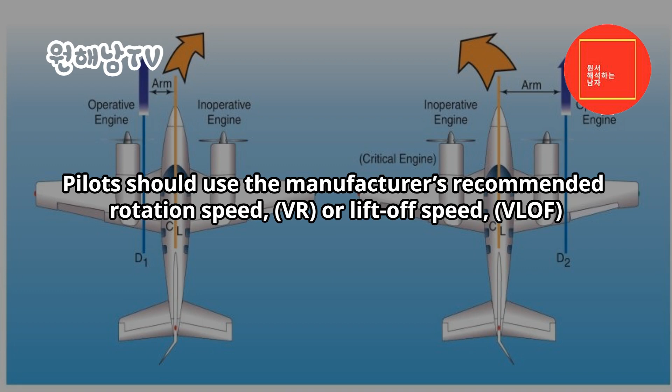Pilots should use the manufacturer's recommended rotation speed, VR, or liftoff speed, VLOF. If no such speeds are published, a minimum of VMC plus 5 knots should be used for VR.

The rotation to a takeoff pitch attitude is performed with smooth control inputs. With a crosswind, the pilot should ensure that the landing gear does not momentarily touch the runway after the airplane has lifted off, as a side drift is present. The rotation may be accomplished more positively and/or at a higher speed under these conditions. However, the pilot should keep in mind that the AFM/POH performance figures for accelerate-stop distance, takeoff ground roll, and distance to clear an obstacle were calculated at the recommended VR and/or VLOF speed.

After lift-off, the next consideration is to gain altitude as rapidly as possible. To assist the pilot in takeoff and initial climb profile, some AFM/POHs give a 50-foot barrier speed to use as a target during rotation, lift-off, and acceleration to Vy. Prior to takeoff, pilots should review the takeoff distance to 50 feet above ground level (AGL) and the stopping distance from 50 feet AGL, and add the distances together. If the runway is no longer than the total value, the odds are very good that if anything fails, it will be an off-runway landing at the least.

After leaving the ground, altitude gain is more important than achieving an excess of airspeed. Experience has shown that excessive speed cannot be effectively converted into altitude in the event of an engine failure. Additional altitude increases the time available to recognize and respond to any aircraft abnormality or emergency during the climb segment.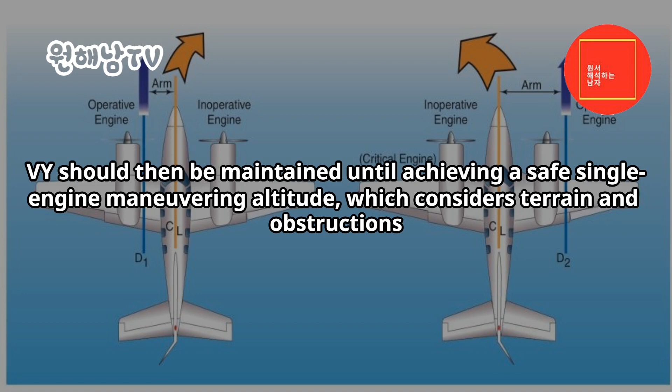Excessive climb attitudes can be just as dangerous as excessive airspeed. Steep climb attitudes limit forward visibility and impede the pilot's ability to detect and avoid other traffic. The airplane should be allowed to accelerate in a shallow climb to attain Vy, the best all-engine rate of climb speed. Vy should then be maintained until achieving a safe single-engine maneuvering altitude, which considers terrain and obstructions. Any speed above or below Vy reduces the performance of the airplane.

Even with all engines operating normally, terrain and obstruction clearance during the initial climb after takeoff is an important pre-flight consideration. Most airliners and most turbine-powered airplanes climb out at an attitude that yields best rate of climb, Vy, usually utilizing a flight management system (FMS).

When to raise the landing gear after takeoff depends on several factors. Normally, the gear should be retracted when there is insufficient runway available for landing.

After a positive rate of climb is established as indicated on the altimeter, if an excessive amount of runway is available, it would not be prudent to leave the landing gear down for an extended period of time and sacrifice climb performance and acceleration. Leaving the gear extended after the point at which a landing cannot be accomplished on the runway is a hazard.

In some multi-engine airplanes operating in a high-density altitude environment, a positive rate of climb with the landing gear down is not possible, so waiting for a positive rate of climb under these conditions is not practicable. Raising the landing gear as early as possible after liftoff drastically decreases the drag profile and significantly increases climb performance should an engine failure occur. An equally important point is that leaving the gear down to land on sufficient runway or overrun is a much better option than landing with the gear retracted.

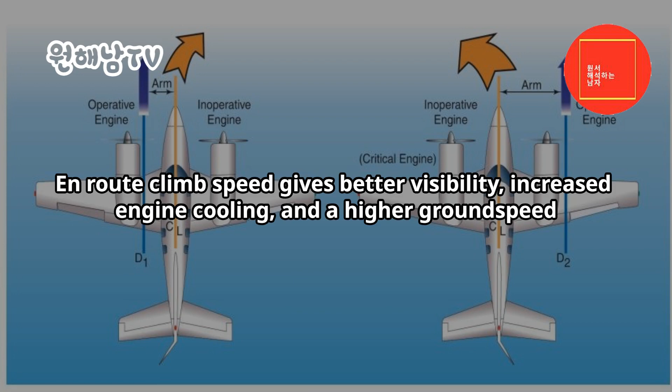Takeoff power can be reduced, if desired, as the transition to en route climb speed is made. Some airplanes have a climb power setting published in the AFM/POH as a recommendation, or sometimes as a limitation, which should then be set for en route climb. If there is no climb power setting published, it is customary, but not a requirement, to reduce manifold pressure and RPM somewhat for en route climb.

The propellers are usually synchronized after the first power reduction and the yaw damper, if installed, engaged. The AFM/POH may also recommend leaning the mixtures during climb. The climb checklist should be accomplished as traffic and workload allow.

The short field takeoff and climb differs from the normal takeoff and climb in the airspeeds and initial climb profile. Some AFM/POHs give separate short field takeoff procedures and performance charts that recommend specific flap settings and airspeeds. Other AFM/POHs do not provide separate short field procedures. In the absence of such specific procedures, the airplane should be operated only as recommended in the AFM/POH. No operation should be conducted contrary to the recommendations in the AFM/POH.

On short field takeoffs in general, just after rotation and lift-off, the airplane should be allowed to accelerate to Vx, making the initial climb over obstacles at Vx and transitioning to Vy as obstacles are cleared.

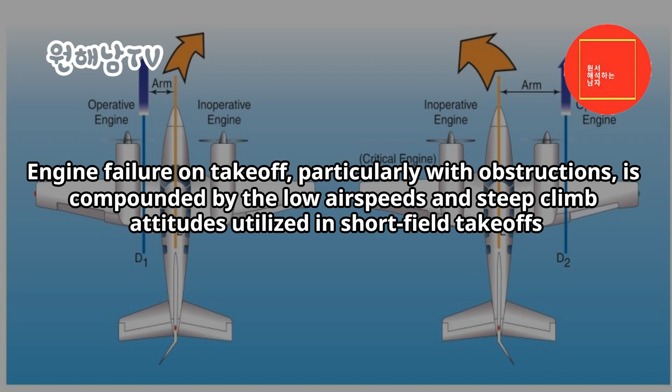The pilot should be prepared to promptly abort the takeoff and land in the event of engine failure on takeoff, with landing gear and flaps extended at airspeeds below Vx. Engine failure on takeoff, particularly with obstructions, is compounded by the low airspeeds and steep climb attitudes utilized in short field takeoffs. Vx and Vxse are often perilously close to VMC, leaving scant margin for error in the event of engine failure as Vxse is assumed.

If flaps were used for takeoff, the engine failure situation becomes even more critical due to the additional drag incurred. If Vx is less than 5 knots higher than VMC, give strong consideration to reducing useful load or using another runway in order to increase the takeoff margins, so that a short field technique is not required.

Rejected takeoff. A takeoff can be rejected for the same reasons a takeoff in a single-engine airplane would be rejected. Once the decision to reject a takeoff is made, the pilot should promptly close both throttles and maintain directional control with the rudder, nose wheel steering, and brakes. Aggressive use of rudder, nose wheel steering, and brakes may be required to keep the airplane on the runway, particularly if an engine failure is not immediately recognized and accompanied by prompt closure of both throttles.

However, the primary objective is not necessarily to stop the airplane in the shortest distance, but to maintain control of the airplane as it decelerates. In some situations, it may be preferable to continue into the overrun area under control, rather than risk directional control loss, landing gear collapse, or tire or brake failure in an attempt to stop the airplane in the shortest possible distance.

Level off and cruise. Upon leveling off at cruising altitude, the pilot should allow the airplane to accelerate at climb power until cruising airspeed is achieved, and then cruise power and RPM should be set. To extract the maximum cruise performance from any airplane, the power setting tables provided by the manufacturer should be closely followed. If the cylinder head and oil temperatures are within their normal ranges, the cowl flaps may be closed. When the engine temperatures have stabilized, the mixtures may be leaned per AFM/POH recommendations. The remainder of the cruise checklist should be completed by this point.

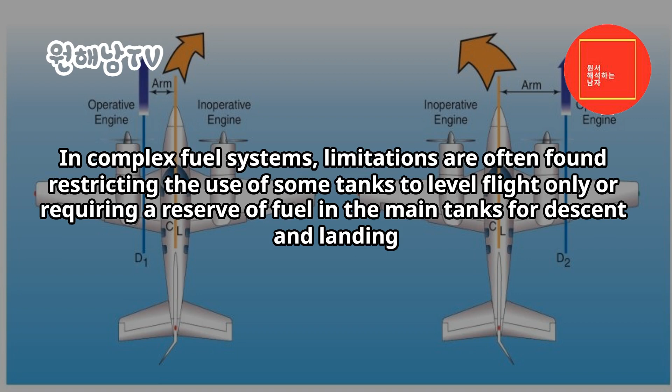Fuel management in multi-engine airplanes is often more complex than in single-engine airplanes. Depending upon system design, the pilot may need to select between main tanks and auxiliary tanks, or even employ fuel transfer from one tank to another. In complex fuel systems, limitations are often found restricting the use of some tanks to level flight only, or requiring a reserve of fuel in the main tanks for descent and landing. Electric fuel pump operation can also vary widely among different models, particularly during tank switching or fuel transfer. Some fuel pumps are to be on for takeoff and landing, others are to be off. There is simply no substitute for thorough systems and AFM/POH knowledge when operating complex aircraft.

Slow flight. There is nothing unusual about maneuvering during slow flight in a multi-engine airplane. Slow flight may be conducted in straight and level flight, turns, climbs, or descents. It can also be conducted in the clean configuration, landing configuration, or at any other combination of landing gear and flaps. Slow flight in a multi-engine airplane should be conducted so the maneuver can be completed no lower than 3,000 feet AGL, or higher if recommended by the manufacturer. In all cases, practicing slow flight should be conducted at an adequate height above the ground for recovery should the airplane inadvertently stall.

Pilots should closely monitor cylinder head and oil temperatures during slow flight. Some high-performance multi-engine airplanes tend to heat up fairly quickly under some conditions of slow flight, particularly in the landing configuration. Simulated engine failures should not be conducted during slow flight. The airplane will be well below VSSE and very close to VMC. Stability, stall warning, or stall avoidance devices should not be disabled while maneuvering during slow flight.

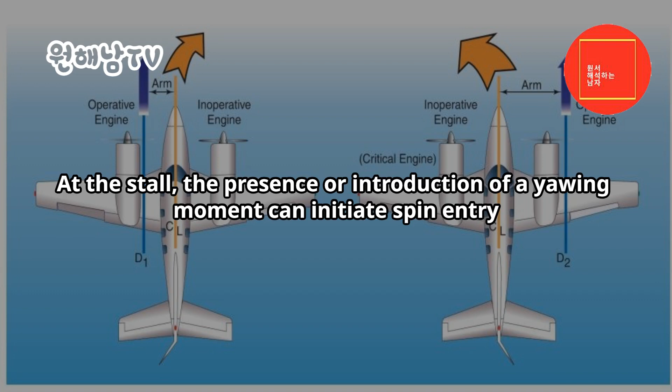Spin awareness and stalls. No multi-engine airplane is approved for spins, and their spin recovery characteristics are generally very poor. It is therefore prudent to practice spin avoidance and maintain a high awareness of situations that can result in an inadvertent spin. Spin awareness: in order to spin any airplane, a stalled condition needs to exist. At the stall, the presence or introduction of a yawing moment can initiate spin entry. In a multi-engine airplane, the yawing moment may be generated by rudder input or asymmetrical thrust.

It follows, then, that spin awareness be at its greatest during VMC demonstrations, stall practice, slow flight, or any condition of high asymmetrical thrust, particularly at low speed, high AOA. Single engine stalls are not part of any multi-engine training curriculum. No engine failure should ever be introduced below safe, intentional one-engine inoperative speed, VSSE. If no VSSE is published, use VYSE. Other than training situations, the multi-engine airplane is only operated below VSSE for mere seconds, just after lift-off or during the last few dozen feet of altitude in preparation for landing.

For spin avoidance when practicing engine failures, the flight instructor should pay strict attention to the maintenance of proper airspeed and bank angle as the learner executes the appropriate procedure. The instructor should also be particularly alert during stall and slow flight practice. While flying with a center of gravity closer to the forward limit provides better stall and spin avoidance characteristics, it does not eliminate the hazard.

When performing a VMC demonstration, the instructor should also be alert for any sign of an impending stall. The learner may be highly focused on the directional control aspect of the maneuver to the extent that impending stall indications go unnoticed. If a VMC demonstration cannot be accomplished under existing conditions of density altitude, the instructor may, for training purposes, utilize a rudder blocking technique. As very few twins have ever been spin tested, none are required to.

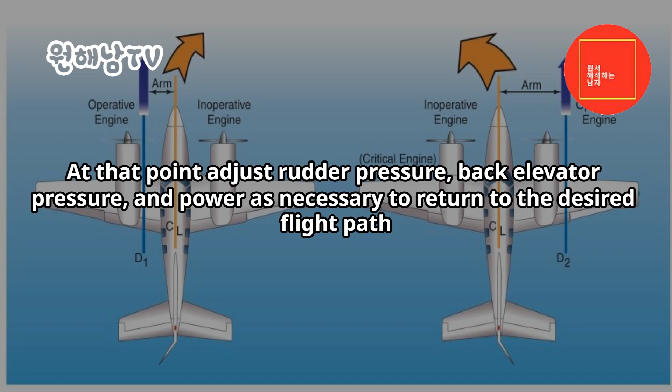Pilots should be aware that a spin recovery will take considerable altitude; therefore, it is critical that corrective action be taken immediately. Stall training. It is recommended that stalls be practiced at an altitude that allows recovery no lower than 3,000 feet AGL for multi-engine airplanes, or higher if recommended by the AFM/POH. Losing altitude during recovery from a stall is to be expected.

Stall characteristics vary among multi-engine airplanes just as they do with single-engine airplanes, and therefore, a pilot should be familiar with them. Yet, the most important stall recovery step in a multi-engine airplane is the same as it is in all airplanes: reduce the angle of attack, AOA. For reference, the stall recovery procedure described in Chapter 5 is included in Figure 13-9. Following a reduction in the AOA and the stall warning being eliminated, the wings should be rolled level and power added as needed.

Immediate full application of power in a stalled condition has an associated risk due to the possibility of asymmetric thrust. In addition, single-engine stalls, or stalls with significantly more power on one engine than the other, should not be attempted due to the likelihood of a departure from controlled flight and possible spin entry. Similarly, simulated engine failures should not be performed during stall entry and recovery.

Power-off approach to stall, approach and landing. A power-off approach to stall is trained and checked to simulate problematic approach and landing scenarios. A power-off approach to stall may be performed with wings level, or from shallow turns, up to 20 degrees of bank. To initiate a power-off approach to stall maneuver, the area surrounding the airplane should first be cleared for possible traffic. The airplane should then be slowed and configured for an approach and landing.

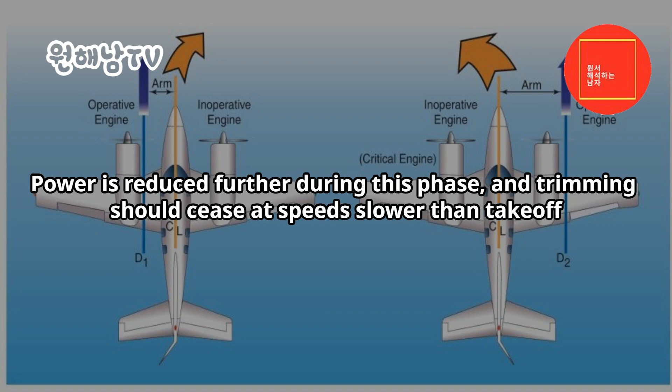A stabilized descent should be established, approximately 500 fpm, and trim adjusted. A turn should be initiated at this point, if desired. The pilot should then smoothly increase the AOA to induce a stall warning. Power is reduced further during this phase, and trimming should cease at speeds slower than takeoff. When the airplane reaches the stall warning, e.g., aural alert, buffet, etc., the recovery is accomplished by first reducing the AOA until the stall warning is eliminated.

The pilot then rolls the wings level with coordinated use of the rudder and smoothly applies power as required. The airplane should be accelerated to Vx, if simulated obstacles are present, or Vy during recovery and climb. Considerable forward elevator/stabilator pressure will be required after the stall recovery as the airplane accelerates to Vx or Vy. Appropriate trim input should be anticipated.

The flap setting should be reduced from full to approach, or as recommended by the manufacturer. Then, with a positive rate of climb, the landing gear is selected up. The remaining flaps are then retracted as a positive rate of climb continues.

Power-on approach to stall, takeoff and departure. A power-on approach to stall is trained and checked to simulate problematic takeoff scenarios. A power-on approach to stall may be performed from straight and level flight or from shallow and medium bank turns, up to 20 degrees of bank. To initiate a power-on approach to stall maneuver, the area surrounding the airplane should always be cleared to look for potential traffic. The airplane is slowed to the manufacturer's recommended liftoff speed.

The airplane should be configured in the takeoff configuration. Trim should be adjusted for this speed. Engine power is then increased to that recommended in the AFM/POH for the practice of power-on approach to stall. In the absence of a recommended setting, use approximately 65% of maximum available power. Begin a turn, if desired, while increasing AOA to induce a stall warning, e.g., aural alert, buffet, etc.

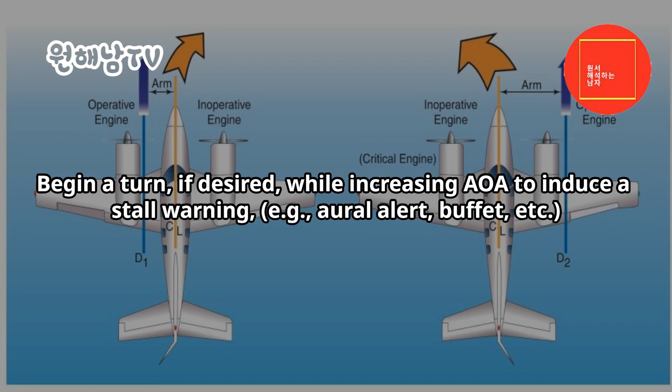Other specified, reduced power settings may be used to simulate performance at higher gross weights and density altitudes. When the airplane reaches the stall warning, the recovery is made first by reducing the AOA until the stall warning is eliminated.

The pilot then rolls the wings level with coordinated use of the rudder and applying power as needed. However, if simulating limited power available for high gross weight and density altitude situations, the power during the recovery should be limited to that specified.

The landing gear should be retracted when a positive rate of climb is attained, and flaps retracted, if flaps were set for takeoff. The target airspeed on recovery is Vx if simulated obstructions are present, or Vy. The pilot should anticipate the need for nose-down trim as the airplane accelerates to Vx or Vy after recovery.

Full stall. It is not recommended that full stalls be practiced unless a qualified flight instructor is present. A power off or power on full stall should only be practiced in a structured lesson with clear learning objectives and cautions discussed. The goals of the training are: A. To provide the pilots the experience of the handling characteristics and dynamic cues, e.g., buffet, roll-off near and at full stall, and B. To reinforce the proper application of the stall recovery procedures.

Given the associated risk of asymmetric thrust at high angles of attack and low rudder effectiveness due to low airspeeds, this reinforces the primary step of first lowering the AOA, which allows all control surfaces to become more effective and allows for roll to be better controlled. Thrust should only be used as needed in the recovery.

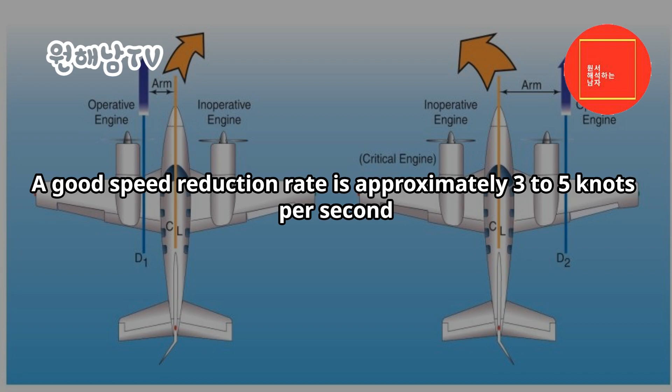Once at an appropriate speed, begin increasing the back pressure on the elevator while maintaining a coordinated 45 degree turn. A good speed reduction rate is approximately 3 to 5 knots per second. Once a stall warning occurs, recover promptly by reducing the AOA until the stall warning stops. Then, roll the wings level with coordinated rudder and add power as necessary to return to the desired flight path.

Normal approach and landing. Given the higher cruising speed, and frequently altitude, of multi-engine airplanes over most single-engine airplanes, the descent needs to be planned in advance. A hurried, last-minute descent with power at or near idle is inefficient and can cause excessive engine cooling. It may also lead to passenger discomfort, particularly if the airplane is unpressurized. As a rule of thumb, if terrain and passenger conditions permit, a maximum of a 500 fpm rate of descent should be planned. Pressurized airplanes can plan for higher descent rates, if desired.

In a descent, some airplanes require a minimum EGT or may have a minimum power setting or cylinder head temperature to maintain. In any case, combinations of very low manifold pressure and high RPM settings are strongly discouraged by engine manufacturers. If higher descent rates are necessary, the pilot should consider extending partial flaps or lowering the landing gear before retarding the power excessively. The descent checklist should be initiated upon leaving cruising altitude and completed before arrival in the terminal area.

Upon arrival in the terminal area, pilots are encouraged to turn on their landing and recognition lights when operating below 10,000 feet, day or night, and especially when operating within 10 miles of any airport or in conditions of reduced visibility. The traffic pattern and approach are typically flown at somewhat higher indicated airspeeds in a multi-engine airplane contrasted to most single-engine airplanes. The pilot may allow for this through an early start on the before landing checklist. This provides time for proper planning, spacing, and thinking well ahead of the airplane.

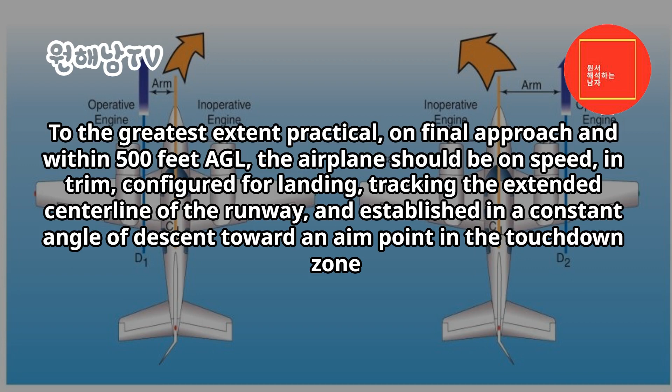To the greatest extent practical, on final approach and within 500 feet AGL, the airplane should be on speed, in trim, configured for landing, tracking the extended centerline of the runway, and established in a constant angle of descent toward an aim point in the touchdown zone. Absent unusual flight conditions, only minor corrections are required to maintain this approach to the roundout and touchdown. The final approach should be made with power and at a speed recommended by the manufacturer, if a recommended speed is not furnished.

The speed should be no slower than the single-engine best rate of climb speed, VYSE, until short final with the landing assured, but in no case less than critical engine out minimum control speed, VMC. Some multi-engine pilots prefer to delay full flap extension to short final with the landing assured. This is an acceptable technique with appropriate experience and familiarity with the airplane.

In the roundout for landing, residual power is gradually reduced to idle. With the higher wing loading of multi-engine airplanes and with the drag from two windmilling propellers, there is minimal float. Full stall landings are generally undesirable in twins. The airplane should be held off as with a high-performance single-engine model, allowing touchdown of the main wheels prior to a full stall. Under favorable wind and runway conditions, the nosewheel can be held off for best aerodynamic braking.

Even as the nosewheel is gently lowered to the runway centerline, continued elevator back pressure greatly assists the wheel brakes in stopping the airplane. If runway length is critical, or with a strong crosswind, or if the surface is contaminated with water, ice, or snow, it is undesirable to rely solely on aerodynamic braking after touchdown. The full weight of the airplane should be placed on the wheels as soon as practicable. The wheel brakes are more effective than aerodynamic braking alone in decelerating the airplane.

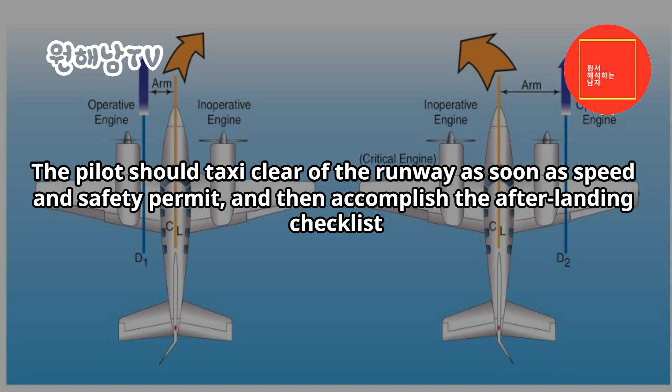The pilot should taxi clear of the runway as soon as speed and safety permit, and then accomplish the after-landing checklist. Ordinarily, no attempt should be made to retract the wing flaps, or perform other checklist duties until the airplane has been brought to a halt when clear of the active runway. Exceptions to this would be the rare operational needs discussed above, to relieve the weight from the wings and place it on the wheels. In these cases, AFM/POH guidance should be followed. The pilot should not indiscriminately reach out for any switch or control on landing rollout. An inadvertent landing gear retraction while meaning to retract the wing flaps may result.

Crosswind approach and landing. The multi-engine airplane is often easier to land in a crosswind than a single-engine airplane due to its higher approach and landing speed. In any event, the principles are no different between singles and twins. Prior to touchdown, the longitudinal axis should be aligned with the runway centerline to avoid landing gear side loads. The two primary methods, crab and wing low, are typically used in conjunction with each other.

As soon as the airplane rolls out onto final approach, the crab angle to track the extended runway centerline is established. This is coordinated flight with adjustments to heading to compensate for wind drift either left or right. Prior to touchdown, the transition to a sideslip is made with the upwind wing lowered and opposite rudder applied to prevent a turn. The airplane touches down on the landing gear of the upwind wing first, followed by that of the downwind wing, and then the nose gear. Follow-through with the flight controls involves an increasing application of aileron into the wind until full control deflection is reached.

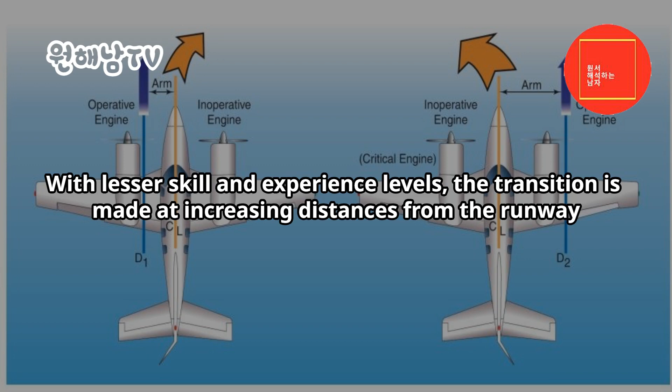The point at which the transition from the crab to the sideslip is made is dependent upon pilot familiarity with the airplane and experience. With high skill and experience levels, the transition can be made during the round-out just before touchdown. With lesser skill and experience levels, the transition is made at increasing distances from the runway.

Some multi-engine airplanes, as some single-engine airplanes, have AFM/POH limitations against slips in excess of a certain time period, 30 seconds, for example. This is to prevent engine power loss from fuel starvation as the fuel in the tank of the lowered wing flows toward the wingtip, away from the fuel pickup point.

This time limit should be observed if the wing low method is utilized. Some multi-engine pilots prefer to use differential power to assist in crosswind landings.

The asymmetrical thrust produces a yawing moment little different from that produced by the rudder. When the upwind wing is lowered, power on the upwind engine is increased to prevent the airplane from turning. This alternate technique is completely acceptable, but most pilots feel they can react to changing wind conditions quicker with rudder and aileron than throttle movement. This is especially true with turbocharged engines, where the throttle response may lag momentarily.

The differential power technique should be practiced with an instructor before being attempted alone.

Short field approach and landing. The primary elements of a short field approach and landing do not differ significantly from a normal approach and landing. Many manufacturers do not publish short field landing techniques or performance charts in the AFM/POH. In the absence of specific short field approach and landing procedures, the airplane should be operated as recommended in the AFM/POH. No operations should be conducted contrary to the AFM/POH recommendations.

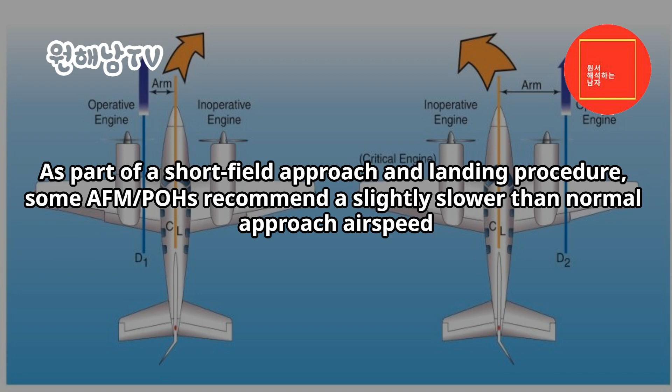The emphasis in a short field approach is on configuration, full flaps, a stabilized approach with a constant angle of descent, and precise airspeed control. As part of a short field approach and landing procedure, some AFM/POHs recommend a slightly slower than normal approach airspeed. If no such slower speed is published, use the AFM/POH recommended normal approach speed.

Full flaps are used to provide the steepest approach angle. If obstacles are present, the approach should be planned so that no drastic power reductions are required after they are cleared. The power should be smoothly reduced to idle in the roundout prior to touchdown.

Pilots should keep in mind that the propeller blast blows over the wings, providing some lift in addition to thrust. Reducing power significantly just after obstacle clearance usually results in a sudden, high sink rate that may lead to a hard landing. After the short field touchdown, maximum stopping effort is achieved by retracting the wing flaps, adding back pressure to the elevator/stabilator, and applying heavy braking.

However, if the runway length permits, the wing flaps should be left in the extended position until the airplane has been stopped clear of the runway. There is always a significant risk of retracting the landing gear instead of the wing flaps when flap retraction is attempted on the landing rollout.

Landing conditions that involve a short field, high winds, or strong crosswinds are just about the only situations where flap retraction on the landing rollout should be considered. When there is an operational need to retract the flaps just after touchdown, it needs to be done deliberately, with the flap handle positively identified before it is moved.

Go-around. When the decision to go around is made, the throttles should be advanced to takeoff power and pitch adjusted to arrest the sink rate. With adequate airspeed, the airplane should be placed in a climb pitch attitude. These actions, accomplished sequentially, arrest the sink rate and place the airplane in the proper attitude for transition to a climb. The initial target airspeed is Vy, or Vx if obstructions are present.

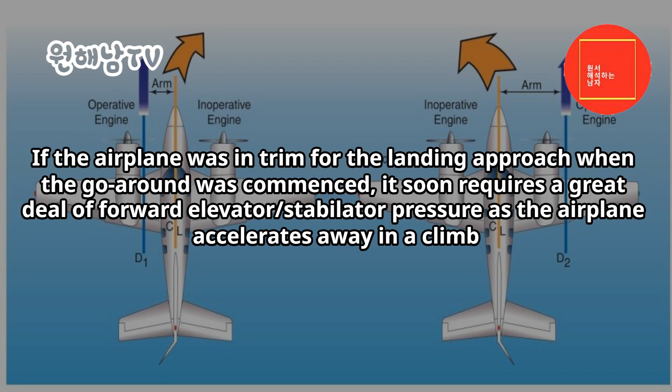If the airplane was in trim for the landing approach when the go-around was commenced, it soon requires a great deal of forward elevator/stabilator pressure as the airplane accelerates away in a climb. The pilot should apply appropriate forward pressure to maintain the desired pitch attitude. Trim should be commenced immediately. The balked landing checklist should be reviewed as workload permits.

Flaps should be retracted before the landing gear for two reasons. First, on most airplanes, full flaps produce more drag than the extended landing gear. Secondly, the airplane tends to settle somewhat with flap retraction, and the landing gear should be down in the event of an inadvertent, momentary touchdown.

Many multi-engine airplanes have a landing gear retraction speed significantly less than the extension speed. Care should be exercised during the go-around not to exceed the retraction speed. If the pilot desires to return for a landing, it is essential to re-accomplish the entire before landing checklist.

An interruption to a pilot's habit patterns, such as a go-around, is a classic scenario for a subsequent gear-up landing. The preceding discussion about performing a go-around assumes that the maneuver was initiated from normal approach speeds or faster.

If the go-around was initiated from a low airspeed, the initial pitch up to a climb attitude should be tempered with the necessity to maintain adequate flying speed throughout the maneuver. Examples include a go-around initiated from the landing roundout or recovery from a bad bounce, as well as a go-around initiated due to an inadvertent approach to a stall. The first priority is always to maintain control and obtain adequate flying speed. A few moments of level or near-level flight may be required as the airplane accelerates up to climb speed.

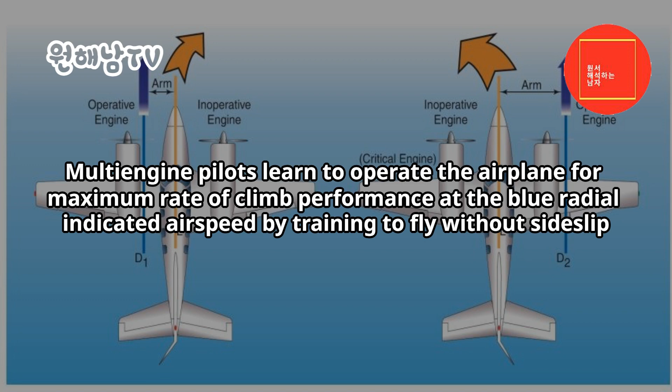Engine inoperative flight principles. There are two main considerations for OEI operations: performance and control. Multi-engine pilots learn to operate the airplane for maximum rate of climb performance at the blue radial indicated airspeed by training to fly without sideslip. Pilots also learn to recognize and recover from loss of directional control associated with the red radial indicated airspeed by performing a VMC demonstration. Since the object of a VMC demonstration is not performance, sideslip occurs during the maneuver. Detailed discussion on both the loss of directional control and maximum OEI climb performance follows.

Derivation of VMC. VMC is a speed established by the manufacturer, published in the AFMPOH, and marked on most airspeed indicators with a red radial line. A knowledgeable and competent multi-engine pilot understands that VMC is not a fixed airspeed under all conditions. VMC is a fixed airspeed only for the very specific set of circumstances under which it was determined during aircraft certification. In reality, VMC varies with a variety of factors as outlined below. The VMC noted in practice and demonstration, or in actual OEI operation, could be less or even greater than the published value, depending on conditions and pilot technique.

Historically, in aircraft certification, VMC is the sea-level calibrated airspeed at which, when the critical engine is suddenly made inoperative, it is possible to maintain control of the airplane. With that engine still inoperative, and then maintain straight flight at the same speed with an angle of bank not more than 5 degrees. The foregoing refers to the determination of VMC under dynamic conditions. This technique is only used by highly experienced test pilots during aircraft certification. It is unsafe to be attempted outside of these circumstances.

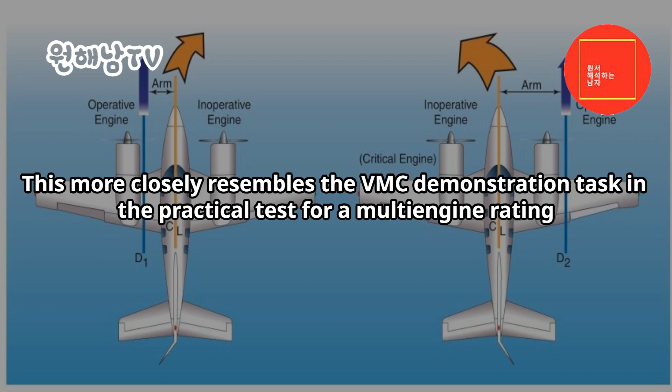The AFMPOH published VMC is determined with the critical engine inoperative. The critical engine is the engine whose failure had the most adverse effect on directional control. On twins with each engine rotating in conventional, clockwise rotation as viewed from the pilot's seat, the critical engine will be the left engine. Multi-engine airplanes are subject to P-factor just as single-engine airplanes are. The descending propeller blade of each engine will produce greater thrust than the ascending blade, when the airplane is operated under power and at positive angles of attack. The descending propeller blade of the right engine is also a greater distance from the center of gravity, and therefore has a longer moment arm than the descending propeller blade of the left engine. As a result, failure of the left engine will result in the most asymmetrical thrust adverse yaw, as the right engine will be providing the remaining thrust.

Figure 13-12. Many twins are designed with a counter-rotating right engine. With this design, the degree of asymmetrical thrust is the same with either engine inoperative. No engine is more critical than the other, and a VMC demonstration may be performed with either engine windmilling.

The following bullets describe the way several factors affect VMC speed for those multi-engine airplanes often used during training, which were certified in accordance with Historical 14 CFR Part 23, Section 23.149. They also describe the conditions used to determine the manufacturer's published speed. Historically, in aircraft certification, dynamic VMC has been determined under the following conditions outlined in Historical 14 CFR Part 23, Section 23.149.

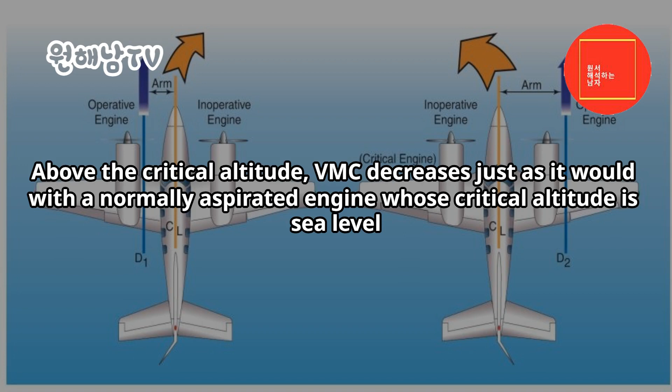Above the critical altitude, VMC decreases just as it would with a normally aspirated engine whose critical altitude is sea level. In order to avoid accidents, test pilots conduct VMC tests at a variety of altitudes, and the results of those tests are then extrapolated to a single, sea-level value.

All propeller controls are in the recommended takeoff position throughout VMC determination, per Section 23.149b5. VMC increases with increased drag on the inoperative engine.

VMC is highest, therefore, when the critical engine propeller is windmilling at the low pitch, high RPM blade angle. VMC is normally determined with the critical engine propeller windmilling in the takeoff position, unless the engine is equipped with an autofeather system. The aircraft is at the most unfavorable weight and center of gravity position.

Per Section 23.149b, VMC increases as the center of gravity, CG, is moved aft. The moment arm of the rudder is reduced, and therefore its effectivity is reduced, as the CG is moved aft.

For a typical light twin, the aftmost CG limit is the most unfavorable CG position. Historically, 14 CFR Part 23 calls for VMC to be determined at the most unfavorable weight.

For twins certificated under CAR3 or early 14 CFR Part 23, the weight at which VMC was determined was not specified. VMC increases as weight is reduced.

As shown in Figure 13-13, with the landing gear retracted, per Section 23.149b4, VMC increases when the landing gear is retracted. Extended landing gear aids directional stability, which tends to decrease VMC.

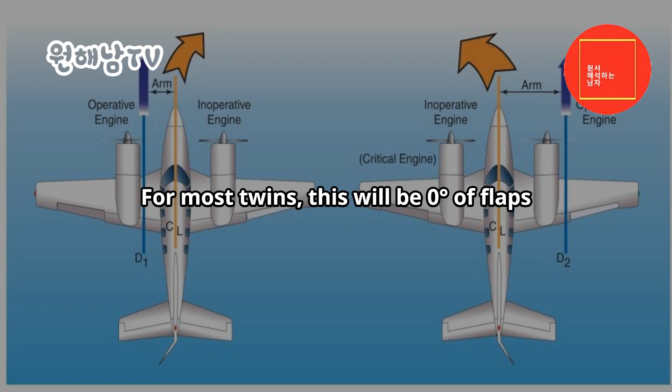With the airplane trimmed for takeoff, per Section 23.149b2, and the airplane airborne with ground effect negligible, per Section 23.149b, the maximum bank angle is 5 degrees, per Section 23.149a.

VMC is highly sensitive to bank angle. To prevent claims of an unrealistically low VMC speed in aircraft certification, the manufacturer is permitted to use a maximum of 5 degrees bank angle toward the operative engine.

The horizontal component of lift generated by the bank balances the side force from the rudder, rather than using sideslip to do so. Sideslip requires more rudder deflection, which in turn increases VMC.

The bank angle works in the manufacturer's favor in lowering VMC, since using high bank angles reduces required rudder deflection. However, this method may result in unsafe flight from both the large sideslip and the need to increase the angle of attack in order to maintain the vertical component of lift.

VMC increases as bank angle decreases. In fact, VMC may increase more than 3 knots for each degree of bank reduction between 5 degrees and wings level.

Since VMC was determined with up to 5 degrees of bank, loss of directional control may be experienced at speeds almost 20 knots above published VMC when the wings are held level. The 5 degrees bank angle maximum is a historical limit imposed upon manufacturers in aircraft certification. The 5 degree bank does not inherently establish zero sideslip or best single-engine climb performance.

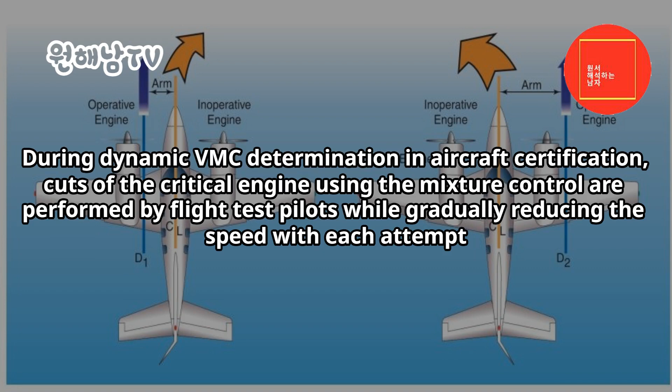Test pilots gradually reduce the speed with each attempt. VMC is the minimum speed at which directional control could be maintained within 20 degrees of the original entry heading when a cut of the critical engine was made.

During such tests, the climb angle with both engines operating was high, and the pitch attitude following the engine cut had to be quickly lowered to regain the initial speed.

Transitioning pilots should understand that attempting to demonstrate VMC with an engine cut from high power, or intentionally failing an engine at speeds less than VSSE, creates a high likelihood for loss of control and an accident.

VMC demo: the actual demonstration of VMC and recovery in flight training more closely resembles static VMC determination in aircraft certification. For a demonstration that avoids the hazard of unintended contact with the ground, the pilot selects an altitude that will allow performance of the maneuver.

This will be at least 3,000 feet AGL. The following description assumes a twin with non-counter rotating engines, where the left engine is critical, with the landing gear retracted and the flaps set to the takeoff position.

The pilot slows the airplane to approximately 10 knots above VSSE or VYSE, whichever is higher, and trims for takeoff. For the remainder of the maneuver, the trim setting remains unaltered.

The pilot selects an entry heading and sets high RPM on both propeller controls. Power on the left engine is throttled back to idle as the right engine power is advanced to the takeoff setting. The landing gear warning horn will sound as long as a throttle is retarded; however, the pilot listens carefully for the stall warning horn or watches for the stall warning light.

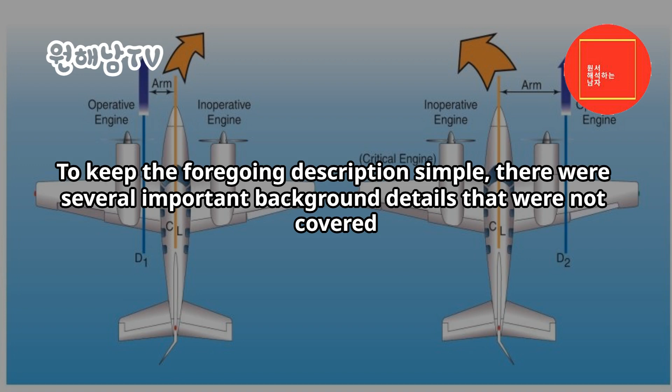To keep the foregoing description simple, there were several important background details that were not covered. The rudder pressure during the demonstration can be quite high. During certification under historical 14 CFR Part 23, Section 23.149e, 150 pounds of force was permitted. Most twins will run out of rudder travel long before 150 pounds of pressure is required. Still, the rudder pressure used during any VMC demonstration may seem considerable.

Maintaining altitude is not a criterion in accomplishing this maneuver. This is a demonstration of controllability, not performance. Many airplanes will lose, or gain, altitude during the demonstration. Remaining at or above a minimum of 3,000 feet AGL throughout the maneuver is considered to be effective risk mitigation of certain hazards.

VMC demo stall avoidance. As discussed earlier, with normally aspirated engines, VMC decreases with altitude. Stalling speed, Vs, however, remains the same. Except for a few models, published VMC is almost always higher than Vs. At sea level there is usually a margin of several knots between VMC and Vs, but the margin decreases with altitude, and at some altitude, VMC and Vs are the same.

Should a stall occur while the airplane is under asymmetrical power, a spin entry is likely. The yawing moment induced from asymmetrical thrust is little different from that induced by full rudder in an intentional spin in the appropriate model of single-engine airplane. In this case, however, the airplane will depart controlled flight in the direction of the idle engine, not in the direction of applied rudder. Twins are not required to demonstrate recoveries from spins, and their spin recovery characteristics are generally very poor.

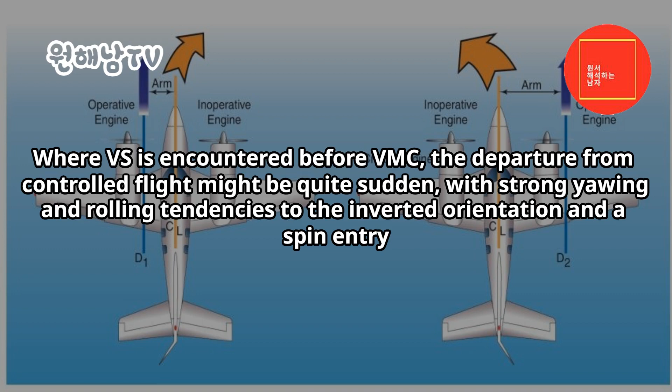Therefore, during a VMC demonstration, if there are any symptoms of an impending stall such as a stall warning light or horn, airframe or elevator buffet, or sudden loss of control effectiveness, the pilot should terminate the maneuver immediately by reducing the angle of attack as the throttle is retarded and return the airplane to the entry airspeed. Note that noise within the flight deck may mask the sound of the stall warning horn.

While the VMC demonstration shows the earliest onset of a loss of directional control when performed in accordance with the foregoing procedures, avoid a stalled condition. Avoid stalls with asymmetrical thrust, such that the VMC demonstration does not degrade into a single engine stall. A VMC demonstration that is allowed to degrade into a single engine stall with high asymmetrical thrust may result in an unrecoverable loss of control and a fatal accident.

An actual demonstration of VMC may not be possible under certain conditions of density altitude, or with airplanes whose VMC is equal to or less than Vs. Under those circumstances, as a training technique, a demonstration of VMC may safely be conducted by artificially limiting rudder travel to simulate maximum available rudder.

A speed well above Vs, approximately 20 knots, is recommended when limiting rudder travel. The rudder limiting technique avoids the hazards of spinning as a result of stalling with high asymmetrical power, yet is effective in demonstrating the loss of directional control. To reduce the risk of a loss of control, avoid performing any VMC demonstration from a high-pitch attitude with both engines operating and then reducing power on one engine.

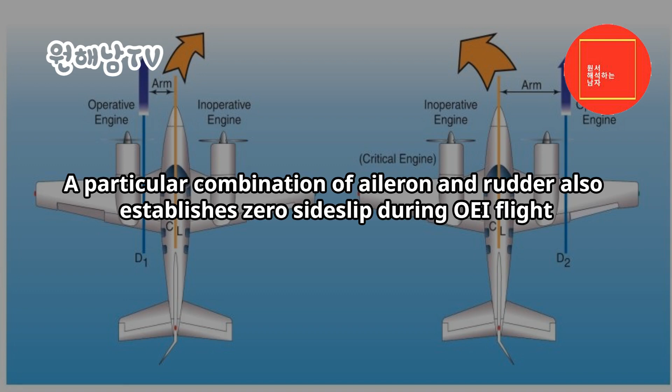This is zero sideslip. Experimentation with slips and skids vividly displays the location of the relative wind. A particular combination of aileron and rudder also establishes zero sideslip during OEI flight. Adequate altitude, flying speed, and caution should be maintained if attempting these maneuvers.

With a single-engine airplane, or a multi-engine airplane with both engines operative, sideslip is eliminated when the ball of the turn and bank instrument is centered. This is a condition of zero sideslip, and the airplane is presenting its smallest possible profile to the relative wind. As a result, drag is at its minimum. Pilots know this as coordinated flight.

In a multi-engine airplane with an inoperative engine, the centered ball is no longer the indicator of zero sideslip due to asymmetric thrust. In fact, there is no flight deck instrument that directly indicates conditions for zero sideslip. In the absence of a yaw string, the pilot needs to place the airplane at a predetermined bank angle and ball position. Since the AFM/POH performance charts for one-engine inoperative flight were determined at zero sideslip, this technique should be used to obtain the charted OEI performance.

There are two different control inputs that can be used to counteract the asymmetric thrust of a failed engine: 1. Yaw from the rudder. 2. The horizontal component of lift that results from bank with the ailerons. Used individually, neither is correct. Used together in the proper combination, zero sideslip and best climb performance are achieved.

Three different scenarios of airplane control inputs are presented below. The first two are not correct and can increase the risk of a loss of control. They are presented to illustrate the reasons for the zero sideslip approach to best climb performance.

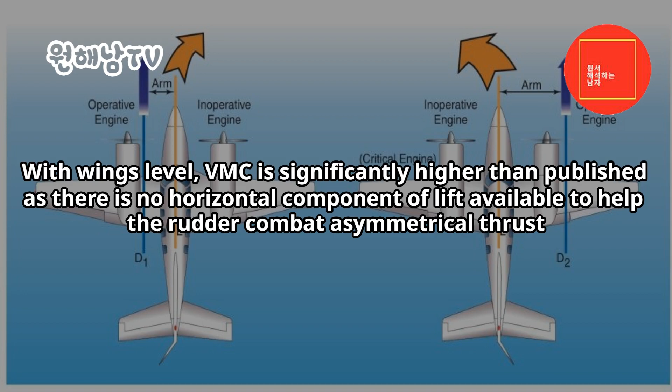2. Engine inoperative flight using ailerons alone requires an 8-10 degree bank angle toward the operative engine. Figure 13-16. This assumes no rudder input. The ball is displaced well toward the operative engine, and climb performance is greatly reduced by the large sideslip toward the operative engine. Due to the increased risk of loss of control, instructors should not normally demonstrate this.

3. Rudder and ailerons used together in the proper combination result in a bank of approximately 2 degrees toward the operative engine. The ball is displaced approximately 1/3 to 1/2 toward the operative engine. The result is zero sideslip and maximum climb performance. Figure 13-17. Any attitude other than zero sideslip increases drag, decreasing performance. VMC under these circumstances is higher than published, as less than the 5 degree bank certification limit is employed.

When bank angle is plotted against climb performance for a hypothetical twin, zero sideslip results in the best, however marginal, climb performance, or the least rate of descent. Whether the airplane can climb depends on the weight of the airplane, density altitude, and pilot technique. If the pilot uses zero bank and all rudder to counteract yaw, climb performance degrades as a result of moderate sideslip. Using bank angle alone, with no rudder, severely degrades climb performance as a result of a large sideslip. The precise condition of zero sideslip, bank angle and ball position, varies slightly from model to model and with available power and airspeed.

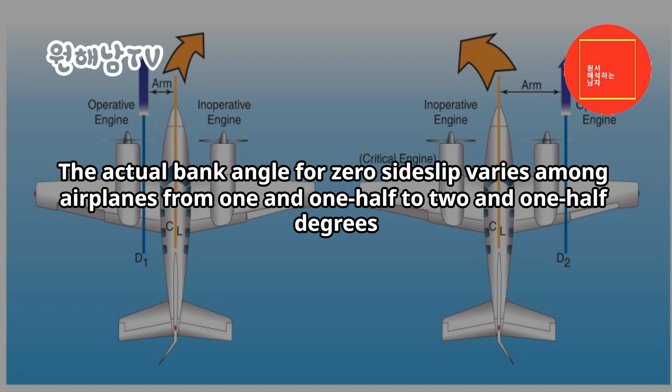If the airplane is not equipped with counter-rotating propellers, it also varies slightly with the engine failed due to P-factor. The foregoing zero sideslip recommendations apply to reciprocating engine multi-engine airplanes flown at VYSE with the inoperative engine feathered. The zero sideslip ball position for straight flight is also the zero sideslip position for turning flight. The actual bank angle for zero sideslip varies among airplanes from 1 1/2 to 2 1/2 degrees. The position of the ball varies from 1/3 to 1/2 of a ball width from instrument center toward the operative engine.

During certain flight training scenarios, pilots and instructors simulate propeller feathering. Zero thrust means the pilot sets power on one engine such that drag from its rotating propeller equals that of a stopped feathered propeller. With an engine set to zero thrust, or feathered, and the airplane slowed to VYSE, a climb with maximum power on the remaining engine reveals the precise bank angle and ball deflection required for zero sideslip and best climb performance. Again, if a yaw string were present, it aligns itself vertically on the windshield as an indication of zero sideslip.

There are very minor changes from this attitude depending upon the engine failed, with non-counter rotating propellers, power available, airspeed, and weight. But without more sensitive testing equipment, these changes are difficult to detect. The only significant difference would be the pitch attitude required to maintain VYSE under different density altitude, power available, and weight conditions.

Low-altitude engine failure scenarios. In OEI flight at low altitudes and airspeed, such as the initial climb after takeoff, pilots should operate the airplane so as to guard against the three major accident factors: 1. Loss of directional control, 2. Loss of performance, and 3. Loss of flying speed. All have equal potential to be lethal. Loss of flying speed is not a factor, however, when the airplane is operated with due regard for directional control and performance.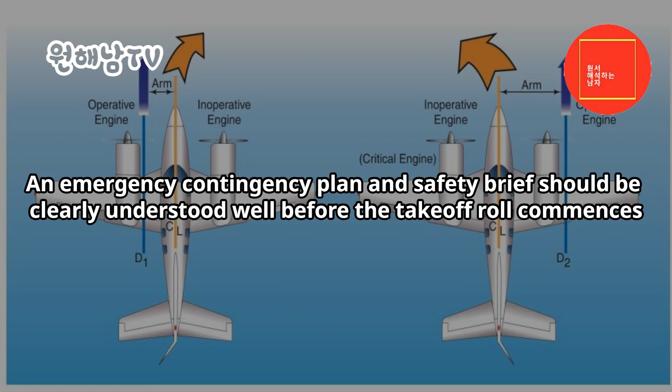An engine failure before a predetermined airspeed or point results in an aborted takeoff. An engine failure after a certain airspeed and point, with the gear up and climb performance assured, results in a continued takeoff. With loss of an engine, it is paramount to maintain airplane control and comply with the manufacturer's recommended emergency procedures. Complete failure of one engine shortly after takeoff can be broadly categorized into one of three following scenarios.

Landing gear down. If the engine failure occurs prior to selecting the landing gear to the up position, figure 13 to 18, keep the nose as straight as possible. Close both throttles, adjust pitch attitude to maintain adequate airspeed, and descend to the runway. Concentrate on a normal landing and do not force the aircraft on the ground. Land on the remaining runway or overrun. Depending upon how quickly the pilot reacts to the sudden yaw, the airplane may run off the side of the runway by the time action is taken. There are really no other practical options.

As discussed earlier, the chances of maintaining directional control while retracting the flaps, if extended, landing gear, feathering the propeller, and accelerating are minimal. On some airplanes with a single engine-driven hydraulic pump, failure of that engine means the only way to raise the landing gear is to allow the engine to windmill or to use a hand pump. This is not a viable alternative during takeoff.

Landing gear control selected up, single engine climb performance inadequate. When operating near or above the single-engine ceiling, and an engine failure is experienced shortly after liftoff, a landing needs to be accomplished on whatever essentially lies ahead, figure 13 to 19. There is also the option of continuing ahead, in a descent at VYSE with the remaining engine producing power, as long as the pilot is not tempted to remain airborne beyond the airplane's performance capability.

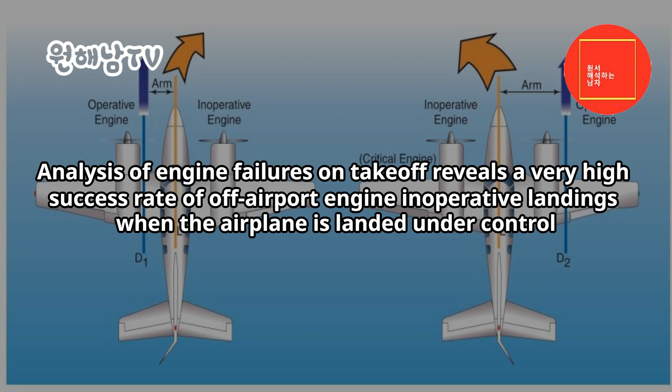Analysis of engine failures on takeoff reveals a very high success rate of off-airport engine inoperative landings when the airplane is landed under control. Analysis also reveals a very high fatality rate in stall spin accidents when the pilot attempts flight beyond the performance capability of the airplane.

As mentioned previously, if the airplane's landing gear retraction mechanism is dependent upon hydraulic pressure from a certain engine-driven pump, failure of that engine can mean a loss of hundreds of feet of altitude as the pilot either windmills the engine to provide hydraulic pressure to raise the gear or raises it manually with a backup pump. Landing gear control selected up, single engine climb performance adequate: if the single engine rate of climb is adequate, the procedures for continued flight should be followed.

Figure 13-20. There are 4 areas of concern: control, configuration, climb, and checklist. Control. The first consideration following engine failure during takeoff is to maintain control of the airplane. Maintaining directional control with prompt and often aggressive rudder application and stopping the yaw is critical to the safety of flight. Ensure that airspeed stays above VMC. If the yaw cannot be controlled with full rudder applied, reducing thrust on the operative engine is the only alternative.

Attempting to correct the roll with aileron without first applying rudder increases drag and adverse yaw and further degrades directional control. After rudder is applied to stop the yaw, a slight amount of aileron should be used to bank the airplane toward the operative engine. This is the most efficient way to control the aircraft, minimize drag, and gain the most performance. Control forces, particularly on the rudder, may be high. The pitch attitude for VYSE has to be lowered from that of VY.

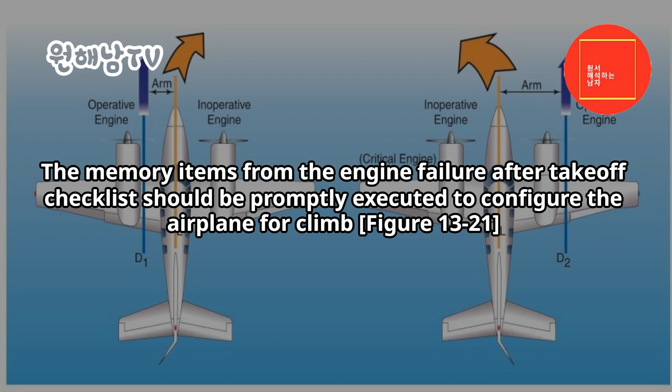Configuration. The memory items from the engine failure after takeoff checklist should be promptly executed to configure the airplane for climb. Figure 13-21. The specific procedures to follow are found in the AFM/POH and checklist for the particular airplane. Most direct the pilot to assume VYSE, set takeoff power, retract the flaps and landing gear, identify, verify, and feather the failed engine. On some airplanes, the landing gear is to be retracted before the flaps.

The identify step is for the pilot to initially identify the failed engine. Confirmation on the engine gauges may or may not be possible, depending upon the failure mode. Identification should be primarily through the control inputs required to maintain straight flight, not the engine gauges. The verify step directs the pilot to retard the throttle of the engine thought to have failed. No change in performance when the suspected throttle is retarded is verification that the correct engine has been identified as failed. The corresponding propeller control should be brought fully aft to feather the engine.

Climb. As soon as directional control is established and the airplane configured for climb, the bank angle should be reduced to that producing best climb performance. Without specific guidance for zero sideslip, a bank of 2 degrees and 1/3 to 1/2 ball deflection on the slip-skid indicator toward the operative engine is suggested. VYSE is maintained with pitch control. As turning flight reduces climb performance, climb should be made straight ahead or with shallow turns to avoid obstacles to an altitude of at least 400 feet AGL before attempting a return to the airport.

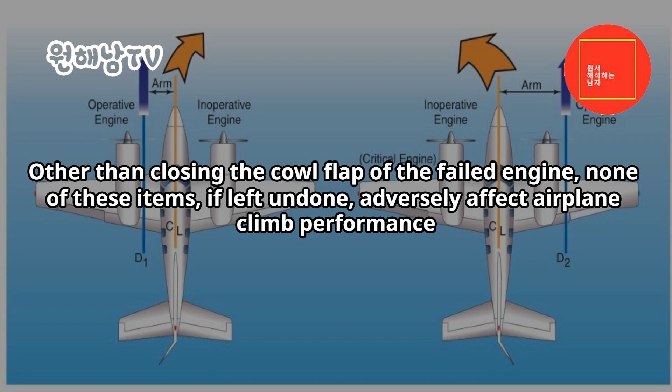Other than closing the cowl flap of the failed engine, none of these items, if left undone, adversely affect airplane climb performance. There is a distinct possibility of actuating an incorrect switch or control if the procedure is rushed. The pilot should concentrate on flying the airplane and extracting maximum performance. If an ATC facility is available, an emergency should be declared. The memory items in the engine failure after takeoff checklist may be redundant with the airplane's existing configuration.

For example, in the third takeoff scenario, the gear and flaps were assumed to already be retracted, yet the memory items included gear and flaps. This is not an oversight. The purpose of the memory items is to either initiate the appropriate action or to confirm that a condition exists. Action on each item may not be required in all cases. The memory items also apply to more than one circumstance.

In an engine failure from a go-around, for example, the landing gear and flaps would likely be extended when the failure occurred. The three preceding takeoff scenarios all include the landing gear as a key element in the decision to land or continue. With the landing gear selector in the down position, for example, continued takeoff and climb is not recommended. This situation, however, is not justification to retract the landing gear the moment the airplane lifts off the surface on takeoff as a normal procedure.

The landing gear should remain selected down as long as there is usable runway or overrun available to land on. The use of wing flaps for takeoff virtually eliminates the likelihood of a single engine climb until the flaps are retracted. There are two time-tested memory aids the pilot may find useful in dealing with engine-out scenarios.

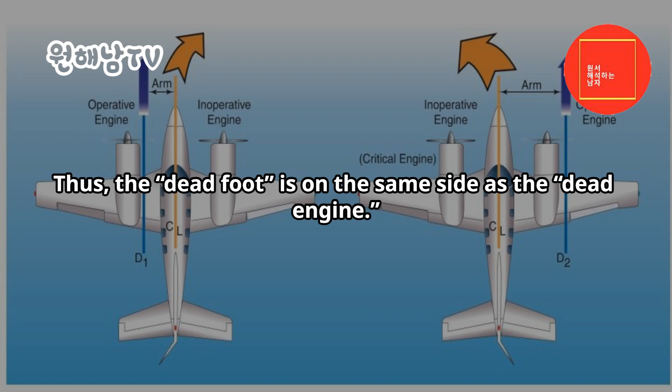The first, dead foot, dead engine, is used to assist in identifying the failed engine. Depending on the failure mode, the pilot may not be able to consistently identify the failed engine in a timely manner from the engine gauges. In maintaining directional control, however, rudder pressure is exerted on the side, left or right, of the airplane with the operating engine. Thus, the dead foot is on the same side as the dead engine. Variations on this saying include idle foot, idle engine, and working foot, working engine.

The second memory aid has to do with climb performance. The phrase "raise the dead" is a reminder that the best climb performance is obtained with a very shallow bank, about 2 degrees toward the operating engine. Therefore, the inoperative, or dead engine should be raised with a very slight bank.

Not all engine failures result in complete power loss. If there is a performance loss when the throttle of the affected engine is retarded, some power is still available. In this case, the pilot may consider allowing the engine to run until the airplane reaches a safe altitude and airspeed for single-engine flight. While shutdown of a malfunctioning engine may prevent additional damage to the engine in certain circumstances, shutting down an engine that can still produce partial power may increase risk for an accident.

Engine failure during flight. Engine failures well above the ground are handled differently than those occurring at lower speeds and altitudes. Cruise airspeed allows better airplane control and altitude, which may permit time for a possible diagnosis and remedy of the failure. Maintaining airplane control, however, is still paramount. Airplanes have been lost at altitude due to apparent fixation on the engine problem to the detriment of flying the airplane. Not all engine failures or malfunctions are catastrophic in nature. Catastrophic, meaning a major mechanical failure that damages the engine and precludes further engine operation.

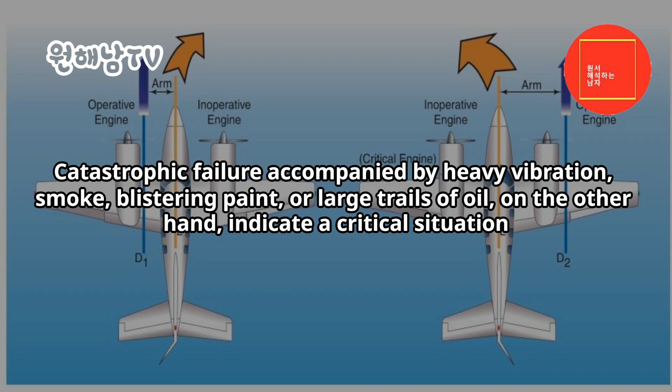Catastrophic failure accompanied by heavy vibration, smoke, blistering paint, or large trails of oil, on the other hand, indicate a critical situation. The affected engine should be feathered and the securing failed engine checklist completed. The pilot should divert to the nearest suitable airport and declare an emergency with ATC for priority handling.

Fuel crossfeed is a method of getting fuel from a tank on one side of the airplane to an operating engine on the other. Crossfeed is used for extended single-engine operation. If a suitable airport is close at hand, there is no need to consider crossfeed. If prolonged flight on a single engine is inevitable due to airport non-availability, then crossfeed allows use of fuel that would otherwise be unavailable to the operating engine. It also permits the pilot to balance the fuel consumption to avoid an out-of-balance wing heaviness.

The AFM/POH procedures for crossfeed vary widely. Thorough fuel system knowledge is essential if crossfeed is to be conducted. Fuel selector positions and fuel boost pump usage for crossfeed differ greatly among multi-engine airplanes. Prior to landing, crossfeed should be terminated and the operating engine returned to its main tank fuel supply.

If the airplane is above its single-engine absolute ceiling at the time of engine failure, it slowly loses altitude. The pilot should maintain VYSE to minimize the rate of altitude loss. This drift-down rate is greatest immediately following the failure and decreases as the single-engine ceiling is approached.

Due to performance variations caused by engine and propeller wear, turbulence, and pilot technique, the airplane may not maintain altitude even at its published single-engine ceiling. Any further rate of sink, however, would likely be modest.

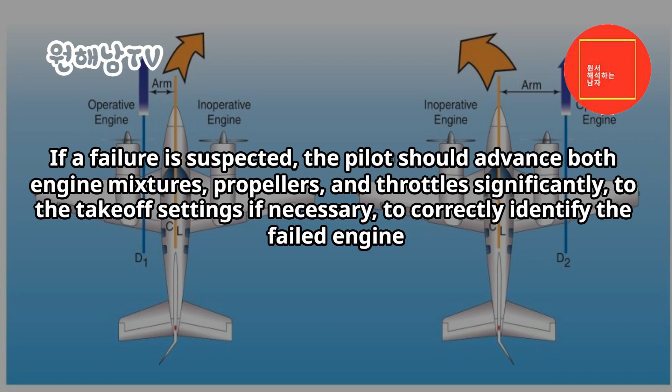An engine failure in a descent or other low power setting can be deceiving. The dramatic yaw and performance loss is absent. At very low power settings, the pilot may not even be aware of a failure. If a failure is suspected, the pilot should advance both engine mixtures, propellers and throttles significantly, to the takeoff settings if necessary, to correctly identify the failed engine. The power on the operative engine can always be reduced later.

Engine inoperative approach and landing. The approach and landing with OEI is essentially the same as a two-engine approach and landing. The traffic pattern should be flown at similar altitudes, airspeeds, and key positions as a two-engine approach. The differences are the reduced power available and the fact that the remaining thrust is asymmetrical. A higher than normal power setting is necessary on the operative engine.

With adequate airspeed and performance, the landing gear can still be extended on the downwind leg, in which case it should be confirmed down no later than abeam the intended point of landing. Performance permitting, initial extension of wing flaps, typically 10 degrees, and a descent from pattern altitude can also be initiated on the downwind leg. The airspeed should be no slower than VYSE.

The direction of the traffic pattern, and therefore the turns, is of no consequence as far as airplane controllability and performance are concerned. It is perfectly acceptable to make turns toward the failed engine.

On the base leg, if performance is adequate, the flaps may be extended to an intermediate setting, typically 25 degrees. If the performance is inadequate, as measured by decay in airspeed or high sink rate, delay further flap extension until closer to the runway. VYSE is still the minimum airspeed to maintain.

On final approach, a normal 3 degree glide path to a landing is desirable. Visual approach slope indicator, VASI, or other vertical path lighting aids should be utilized if available. Slightly steeper approaches may be acceptable. However, a long, flat, low approach should be avoided. Large, sudden power applications or reductions should also be avoided.

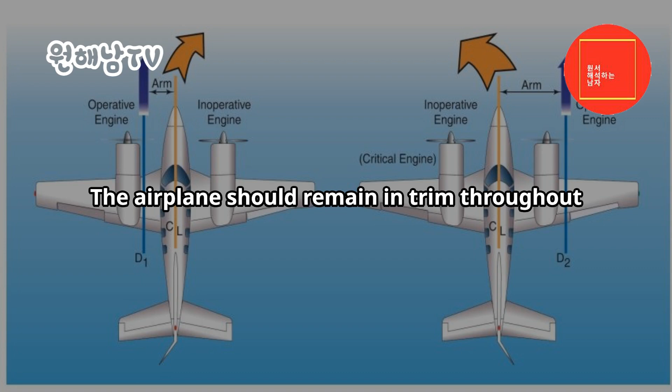The pilot should be prepared, however, for a rudder trim change as the power of the operating engine is reduced to idle in the roundout just prior to touchdown. With drag from only one windmilling propeller, the airplane tends to float more than on a two-engine approach. Precise airspeed control therefore is essential, especially when landing on a short, wet, and/or slippery surface.

Some pilots favor resetting the rudder trim to neutral on final and compensating for yaw by holding rudder pressure for the remainder of the approach. This eliminates the rudder trim change close to the ground as the throttle is closed during the roundout for landing. This technique eliminates the need for groping for the rudder trim and manipulating it to neutral during final approach, which many pilots find to be highly distracting. AFM/POH recommendations or personal preference should be used.

A single engine go-around on final approach may not be possible. As a practical matter in single-engine approaches, once the airplane is on final approach with landing gear and flaps extended, it is committed to land on the intended runway, on another runway, a taxiway, or grassy infield. Most light twins do not have the performance to climb on one engine with landing gear and flaps extended.

Considerable altitude is lost while maintaining VYSE and retracting landing gear and flaps. Losses of 500 feet or more are not unusual. If the landing gear has been lowered with an alternate means of extension, retraction may not be possible, virtually negating any climb capability. Multi-engine training considerations.

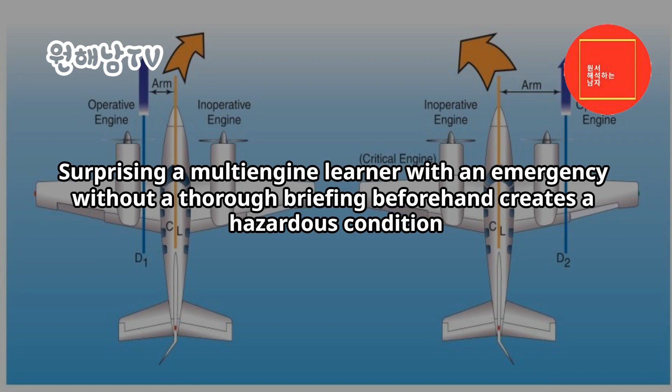A clear understanding exists as to how simulated emergencies will be introduced, and what action the learner is expected to take. The introduction, practice, and testing of emergency procedures has always been a sensitive subject. Surprising a multi-engine learner with an emergency without a thorough briefing beforehand creates a hazardous condition.

Simulated engine failures, for example, can very quickly become actual emergencies or lead to loss of the airplane when approached carelessly. Stall spin accidents in training for emergencies rival the number of stall spin accidents from actual emergencies. The training risk normally gets mitigated by a briefing.

Pulling circuit breakers is not recommended for training purposes and can lead to a subsequent gear-up landing.

Many normal, abnormal, and emergency procedures can be introduced and practiced in the airplane as it sits on the ground without the engines running. In this respect, the airplane is used as a procedures trainer. The value of this training may be substantial. The engines do not have to be operating for real learning to occur.

Upon completion of a training session, care should be taken to restore items to their proper positions.

Pilots who do not use a checklist effectively will be at a significant disadvantage in multi-engine airplanes. Use of the checklist is essential to safe operation of airplanes, and it is risky to conduct a flight without one. The manufacturer's checklist or an aftermarket checklist that conforms to the manufacturer's procedures for the specific make, model, and model year may be used.

If there is a procedural discrepancy between the checklist and the AFM/POH, then the AFM/POH always takes precedence. Certain immediate action items, such as a response to an engine failure in a critical phase of flight, are best committed to memory. After they are accomplished, and as workload permits, the pilot can compare the action taken with a checklist.

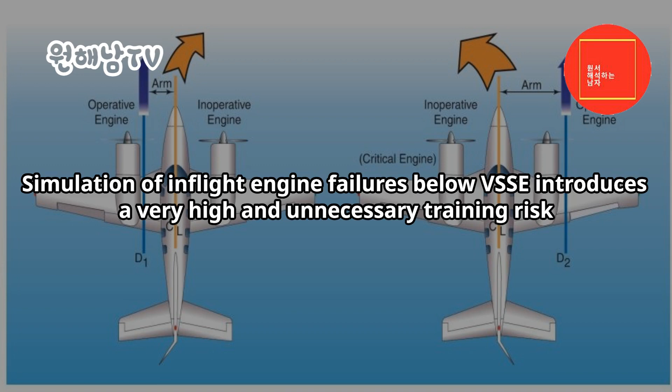Simulation of in-flight engine failures below VSSE introduces a very high and unnecessary training risk. If the engines are equipped with dynamic crankshaft counterweights, it is essential to make throttle reductions for simulated failures smoothly. Other areas leading to dynamic counterweight damage include high RPM and low manifold pressure combinations, overboosting, and propeller feathering. Severe damage or repetitive abuse to counterweights will eventually lead to engine failure.

Dynamic counterweights are found on larger, more complex engines. Instructors may check with maintenance personnel or the engine manufacturer to determine if their airplane engines are so equipped.

When an instructor simulates an engine failure, the learner should respond with the appropriate memory items and retard the appropriate propeller control toward the feather position. Assuming zero thrust will be set, the instructor promptly moves the propeller control forward and sets the appropriate manifold pressure and RPM. It is vital that the learner be kept informed of the instructor's intentions.

At this point, the instructor may say words to the effect, 'I have the right engine, you have the left. I have set zero thrust and the right engine is simulated feathered.' Any ambiguity as to who is operating what systems or controls increases the likelihood of an unintended outcome.

Following a simulated engine failure, the instructor cares for the failed engine just as the learner cares for the operative engine. If zero thrust is set to simulate a feathered propeller, the cowl flap is normally closed and the mixture leaned. An occasional clearing of the engine is also desirable. If possible, avoid high power applications immediately following a prolonged cool down at a zero thrust power setting.

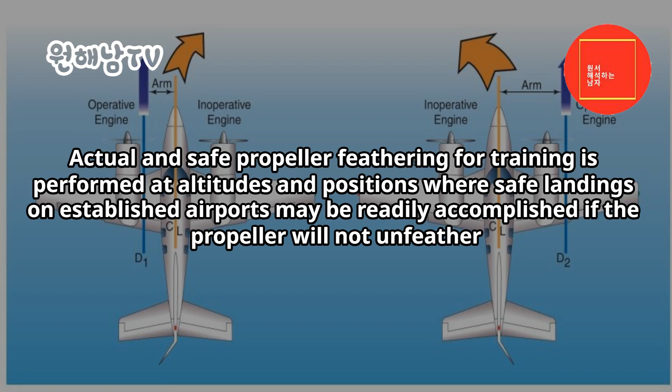Actual and safe propeller feathering for training is performed at altitudes and positions where safe landings on established airports may be readily accomplished if the propeller will not unfeather. Plan unfeathering and restart to be completed no lower than 3,000 feet AGL, at certain elevations and with many popular multi-engine training airplanes.

This may be above the single-engine service ceiling, and level flight will not be possible. Repeated feathering and unfeathering is hard on the engine and airframe, and is done as necessary to ensure adequate training. The FAA's Airman Certification Standards for a multi-engine class rating contains a task for feathering and unfeathering of one propeller during flight in airplanes, in which it is safe to do so.

While much of this chapter has been devoted to the unique flight characteristics of a multi-engine airplane with one engine inoperative, the modern well-maintained reciprocating engine is remarkably reliable. When training in an airplane, initiation of a simulated engine inoperative emergency at low altitude normally occurs at a minimum of 400 feet AGL to mitigate the risk involved, and only after the learner has successfully mastered engine inoperative procedures at higher altitudes. Initiating a simulated low-altitude engine inoperative emergency immediately after liftoff, or below VSSE, creates a situation with non-existent safety margins for training in maneuvers that would be hazardous in flight, or for initial and recurrent qualification in an advanced multi-engine airplane.

Consider a simulator training center or manufacturer's training course. Comprehensive training manuals and classroom instruction are available, along with system training aids, audio visuals, and flight training devices and simulators. Training under a wide variety of environmental and aircraft conditions is available through simulation. Emergency procedures that would be either dangerous or impossible to accomplish in an airplane can be done safely and effectively in a flight training device or simulator. The flight training device or simulator need not necessarily duplicate the specific make and model of airplane to be useful. Highly effective instruction can be obtained in training devices for other makes and models, as well as generic training devices.

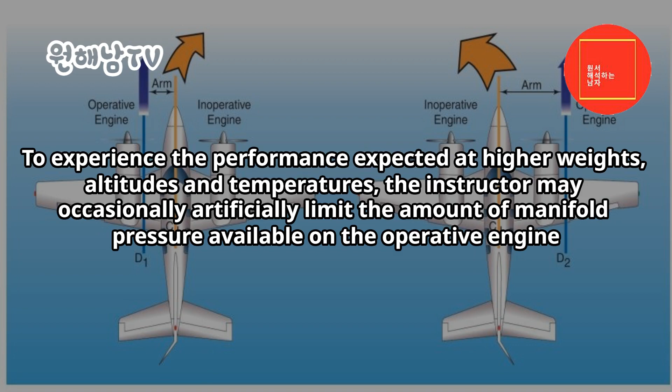The majority of multi-engine training is conducted in 4 to 6 place airplanes at weights significantly less than maximum. Single-engine performance, particularly at low-density altitudes, may be deceptively good. To experience the performance expected at higher weights, altitudes, and temperatures, the instructor may occasionally artificially limit the amount of manifold pressure available on the operative engine. Airport operations above the single-engine ceiling can also be simulated in this manner. Avoid loading the airplane with passengers to practice emergencies at maximum takeoff weight, since this practice creates an unnecessary training hazard.

The use of the touch-and-go landing and takeoff in multi-engine flight training has always been somewhat controversial. The value of the learning experience may be offset by the hazards of reconfiguring the airplane for takeoff in extremely limited time, as well as the loss of the follow-through ordinarily experienced in a full-stop landing. Touch-and-goes are not recommended during initial aircraft familiarization in multi-engine airplanes. If touch-and-goes are to be performed at all, the learner and instructor responsibilities should be carefully briefed prior to each flight. Following touchdown, the learner will ordinarily maintain directional control while keeping the left hand on the yoke and the right hand on the throttles.

The instructor resets the flaps and trim and announces when the airplane has been reconfigured. The multi-engine airplane uses considerably more runway to perform a touch-and-go than a single-engine airplane. A full-stop, taxi-back landing is preferable during initial familiarization. Solo touch-and-goes in twins are strongly discouraged.

Chapter summary. Small multi-engine airplanes handle much like single-engine airplanes as long as both engines are functioning normally. A competent multi-engine pilot, however, acquires the additional knowledge, risk mitigation strategies, and practical skills required to fly a multi-engine airplane in case a loss of thrust from one engine actually occurs. In that case, the pilot will be able to take appropriate action leading to a safe outcome.